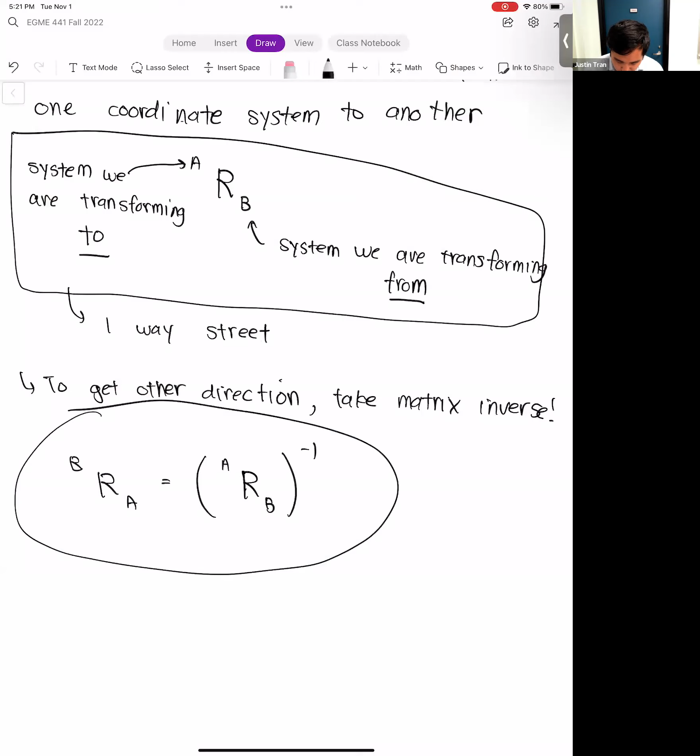Hey Charles, how's it going? Tired, yeah, it's that time of the semester. I feel like it's that time of the semester all semester. It's always a grind.

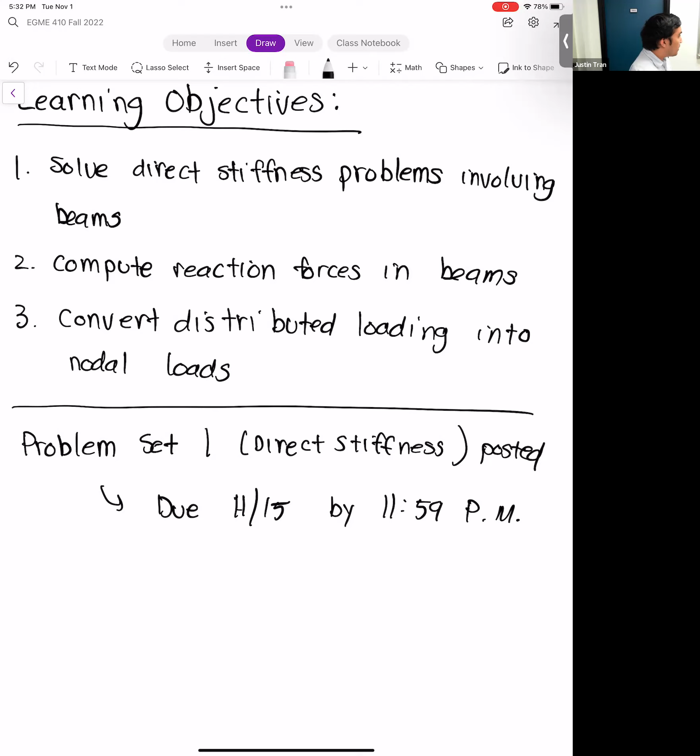After that, the next big thing in this class, now that the midterm project is done, is the midterm exam. So we do have one exam in this class, and the content for the exam is going to be purely based on the direct stiffness stuff.

The plan is to have the exam in class on the last day before Thanksgiving break. So this is going to be on Thursday, November 17th, in class.

These two things are very closely related. What you can expect on the exam are problems that look pretty much the same as on the homework, except probably a little bit easier because you don't have that much time on the exam.

I always try to make the problems pretty consistent with what I have on the homework. So if you can do the homeworks, then I'd say you're in great shape for the exam. Start working on the homework, and if you have questions, definitely let me know. I'm more than happy to answer.

It's not open notes, but you will be allowed a cheat sheet. What I always allow in my exams is a single 8.5 by 11 sheet of notes. You can write on both sides, whatever you want on it. The only thing I ask is that the cheat sheet be readable.

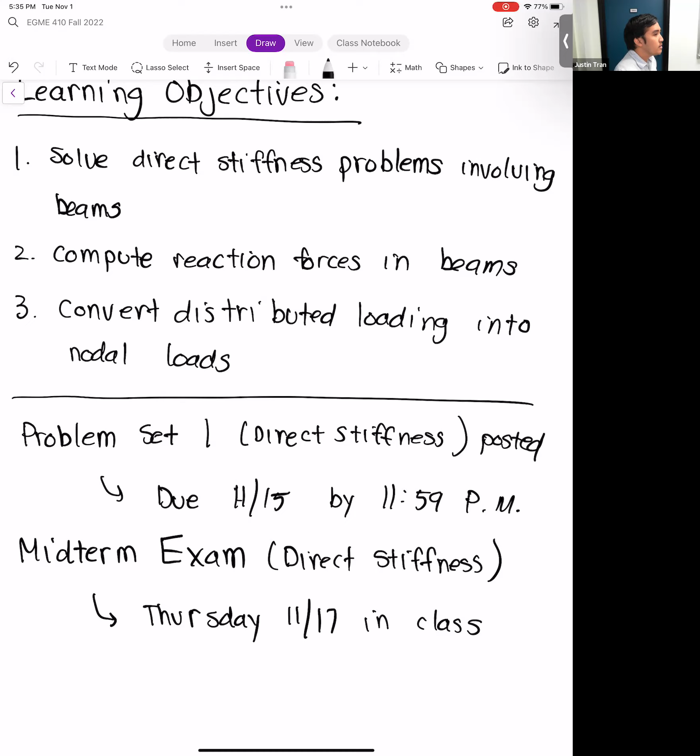We're going to pick up where we left off last Thursday, on beam equations. Question: will we go over how exactly to bring personal SolidWorks into ANSYS? Yes, we'll be reviewing that once we start talking more about the final project.

Question: do I suggest having a model the size of a toy? I think it helps just because it's easier to visualize that way, but you can also do bigger stuff. There's really no limitation, the only requirement is that you have a CAD model for it, and you can get one from somewhere online too, it's not something you have to make yourself.

Also, I know licensing is an issue, but even for big objects, sometimes you don't need as fine a mesh, if the deformations and stresses don't vary all that much. We can talk more about the final project probably on Tuesday. I'll give you guys a break from ANSYS for a while.

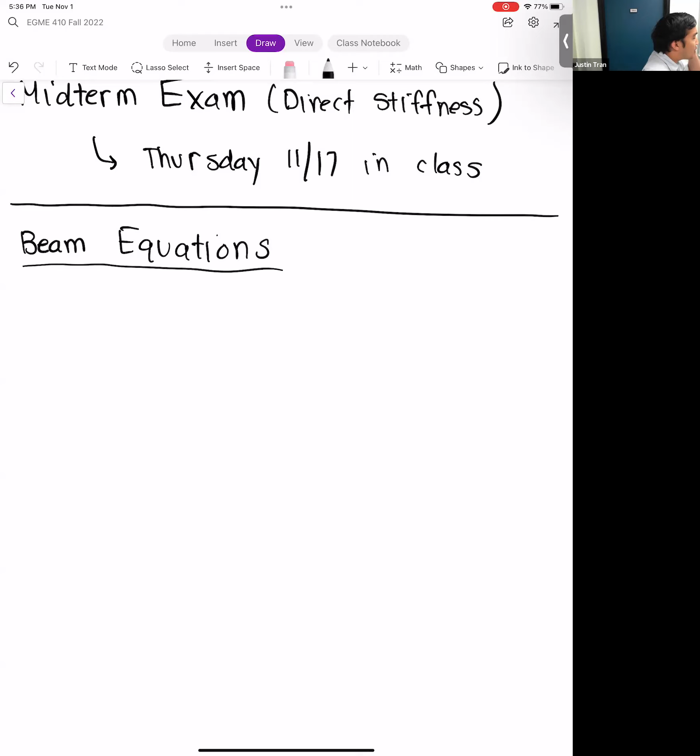Okay, beam equations. This is the last chapter in our direct stiffness unit, and it's all about how we can apply the direct stiffness method to solving for beam deformations.

Beams are quite different from the elements we've looked at before. We've looked at spring elements and truss elements, and even though springs and truss bars are quite different from each other, they deform in basically the same way, they can only be compressed or stretched. Beam elements, on the other hand, are different.

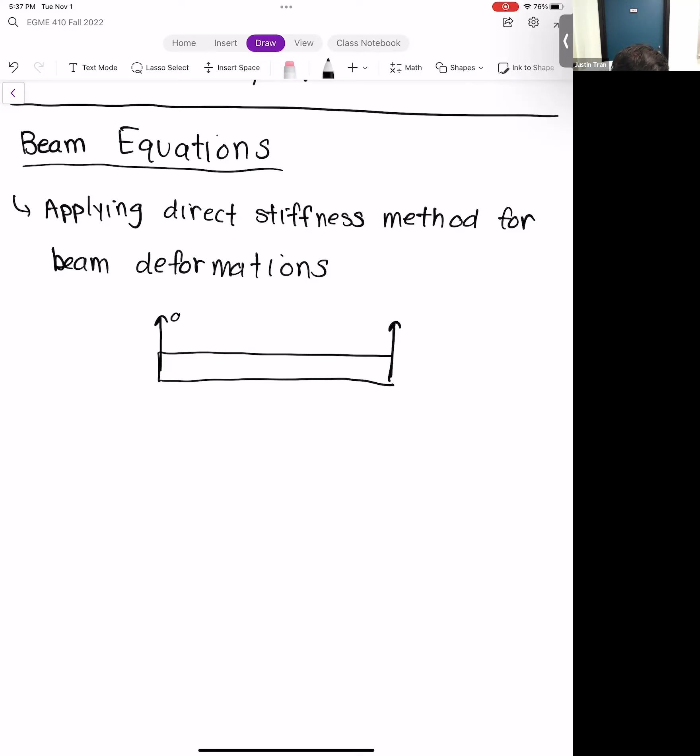Beam elements can deform perpendicular to its length. We call that deformation in the y direction, so that's d1y, d2y. They also consider rotations, so we have theta 1 and theta 2. What we covered last time was the element stiffness matrix for a beam.

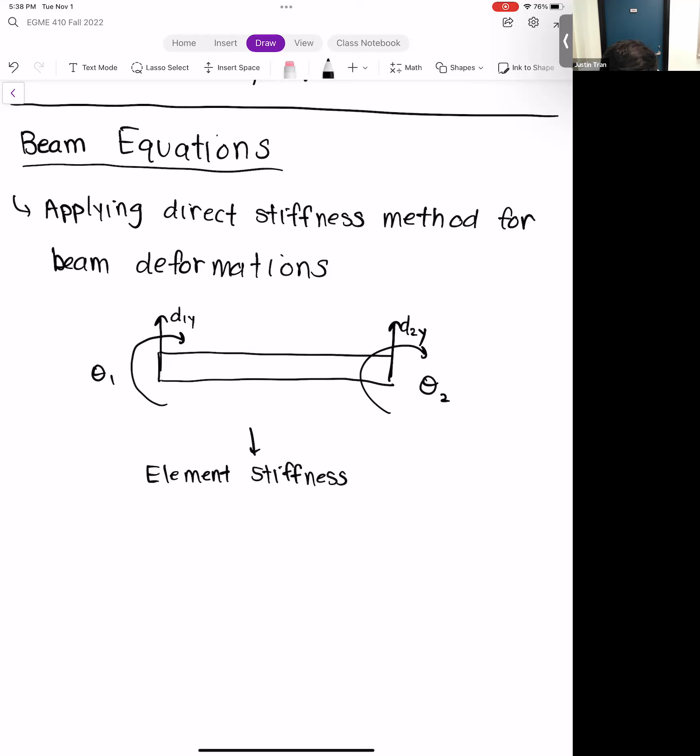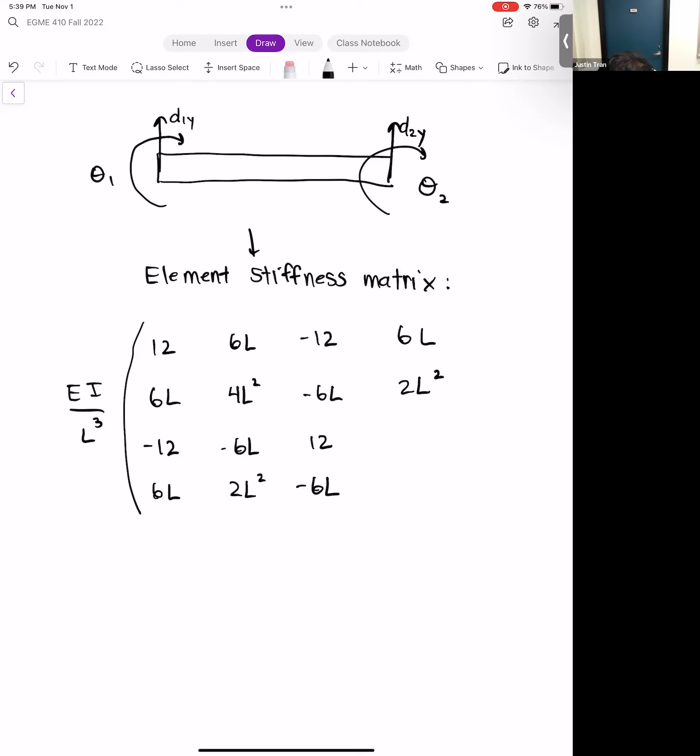If you have a beam, you can define its element stiffness matrix like this: E I over L cubed. Since our beam here has 4 degrees of freedom, we can solve for 4 things on a beam, so our element stiffness matrix also has to be 4 by 4. So our beam element stiffness matrix has entries 12, 6L, minus 12, 6L; 6L, 4L squared, minus 6L, 2L squared; minus 12... that's what our beam element stiffness matrix looks like.

Of course, if we relate this to the nodal degrees of freedom, we have d1y, theta 1, d2y, and theta 2. Based on this beam element stiffness matrix, we can then apply this to our direct stiffness method. But remember, the direct stiffness method itself is always exactly the same, the only thing that changes is what we apply for the element stiffness matrix.

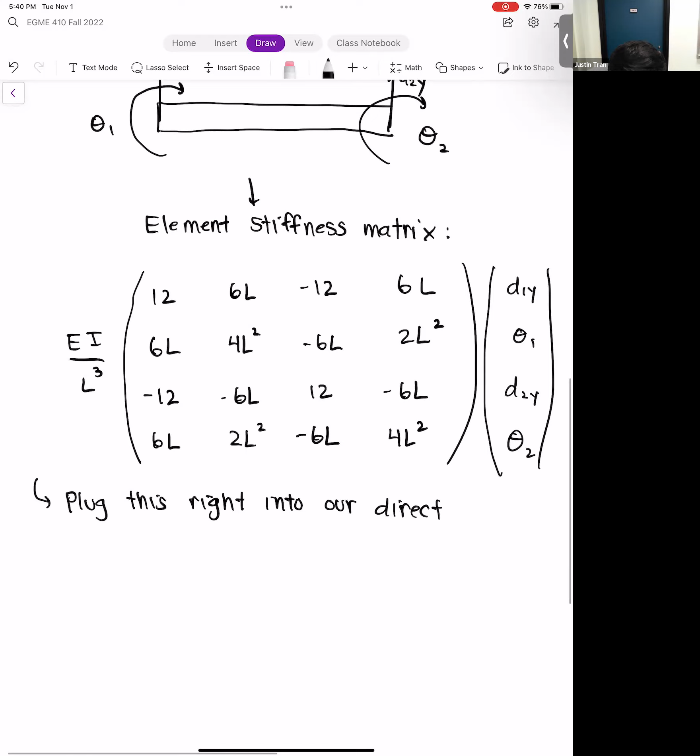So let me remind you of the steps that we take whenever we're solving a finite element problem by hand. Actually, ANSYS uses this process as well—it's just the way it accomplishes it is different.

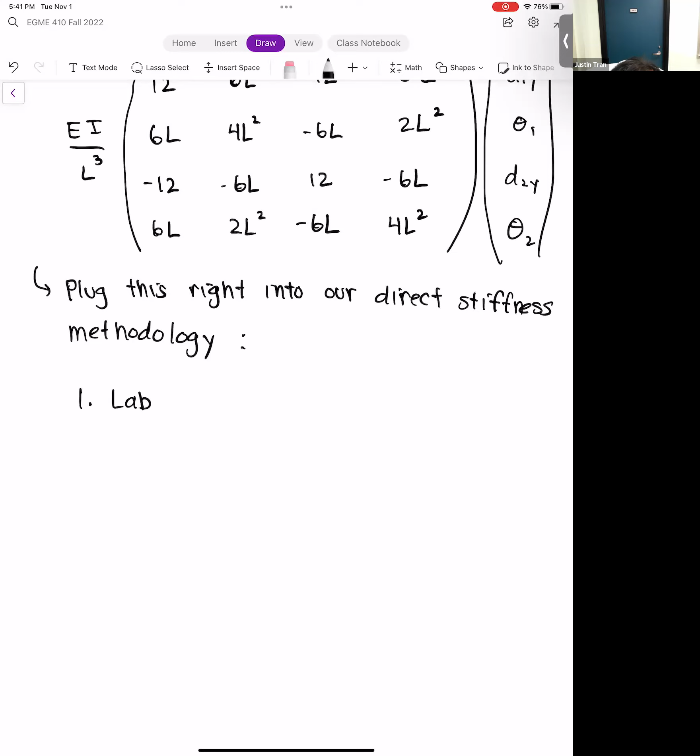Step 1 is to label the elements and nodes. That's most of the time done for you. Step 2 is to compute element stiffness matrices for each element—basically you're going to be computing the entries above there.

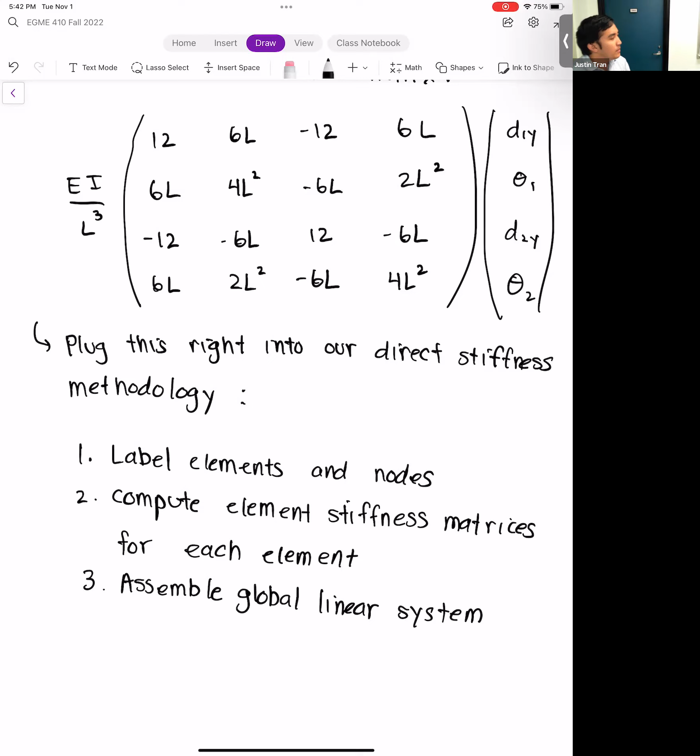Step 3 is to assemble the global linear system. Remember, we want to put all of the element stiffness matrices into a single framework so that we can actually solve it.

Step 4 is to apply boundary conditions, which are going to modify our global linear system. Step 5 is to solve it—or in other words, MATLAB's time to shine. Once you set up the system, that's about as far as you need to take it by hand calculations, and step 5 is we turn it over to MATLAB to solve it for us.

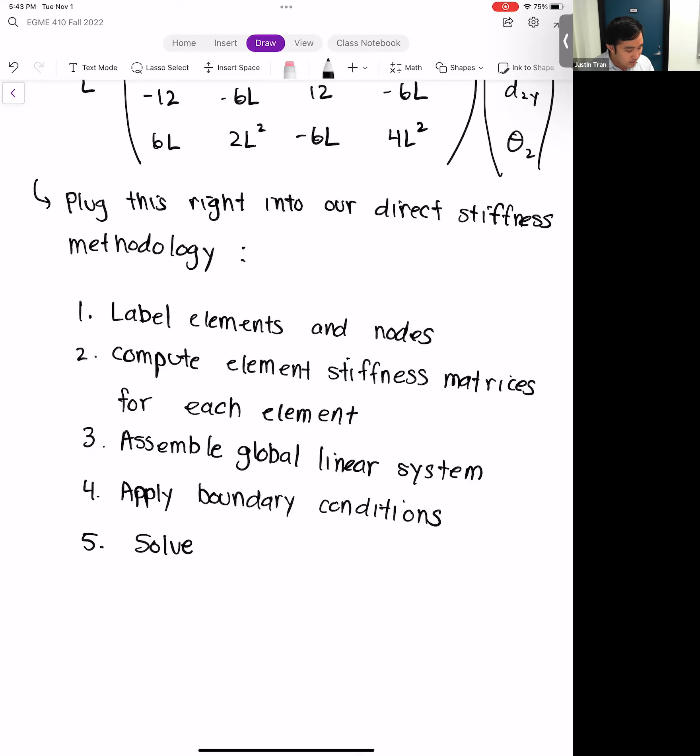All right, let's do an example, and this time we're going to put numbers in it so we can actually see it in action. We're going to go through this whole process. What's going to be interesting about this example is that we're going to combine beams and springs.

So let's consider the following beam.

Question: for the midterm, are we going to be able to use MATLAB as well, or just go up to step 4? For the midterm there's going to be no computers, so you're just going to have to take it up to step 4. What I'm going to check is if you set up the global linear system correctly.

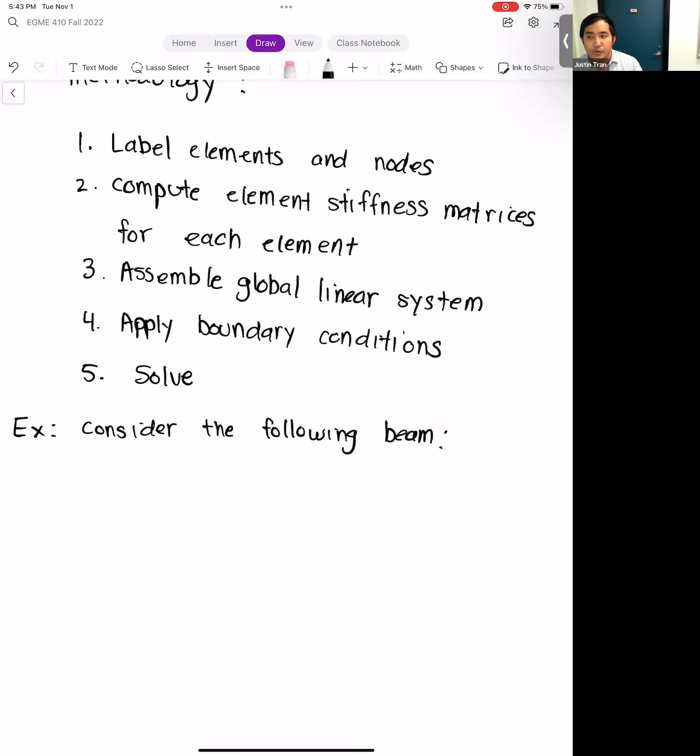All right, so let's say that we have a long beam like this, and I'm going to split it into 2 elements. We're going to have element A on the left and element B on the right. We'll say each of these beams have equal length, and the length is going to be 3 meters.

Let me go ahead and start labeling the nodes. We'll call node 1 attached to the wall. Node 2 is going to be right in between elements A and B. And node 3 is going to be at the very end of the beam.

At the end of the beam here, we're going to say that this is also being supported by a spring—so it's a beam that's supported by a spring at the very end. We'll call this spring element C, and the point at which the spring is attached to the ground we'll call node 4.

All right, so let me define the parameters for the elements. We'll say that elements A and B are identical, so the Young's modulus is going to be the same for both: 210 gigapascals.

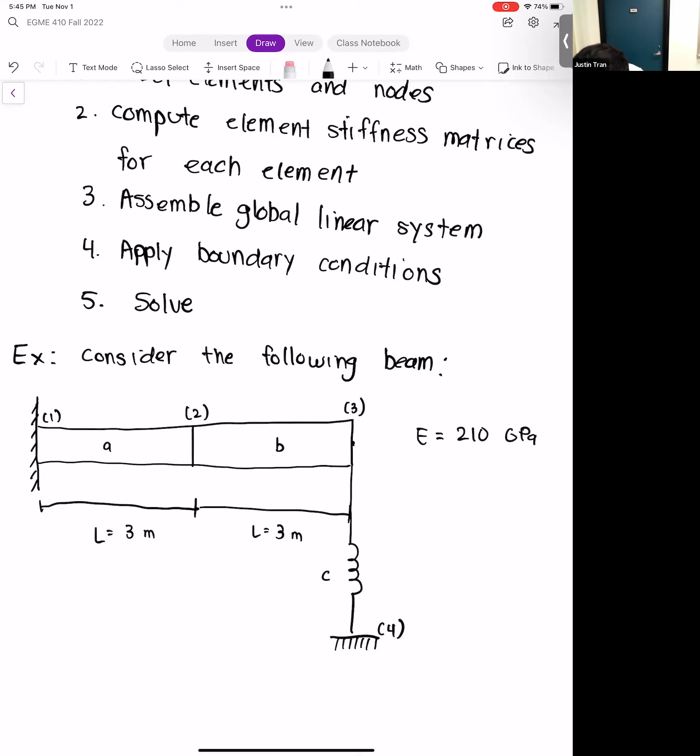The moment of inertia for the beam is going to be 2 times 10 to the minus 4 meters to the 4th. And for the spring constant for element C, we'll say that this is equal to 200 kilonewtons per meter.

So that's the configuration for the problem, but we also need a load. Let's say we have a load being applied directly on node 3—we'll call that load P, with a magnitude of 50 kilonewtons.

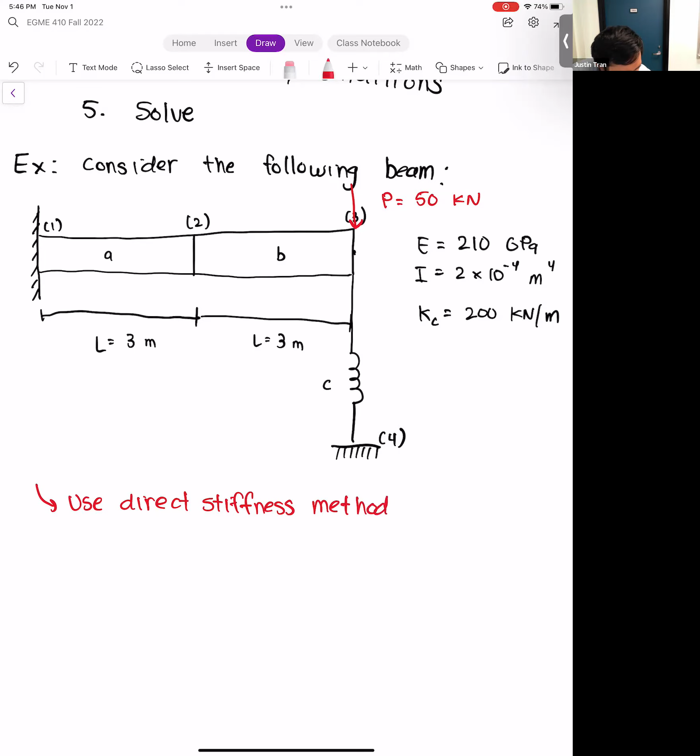All right, so based on the information given in this problem, let's use the direct stiffness method to compute the nodal displacements, or nodal deformations, at each of the nodes.

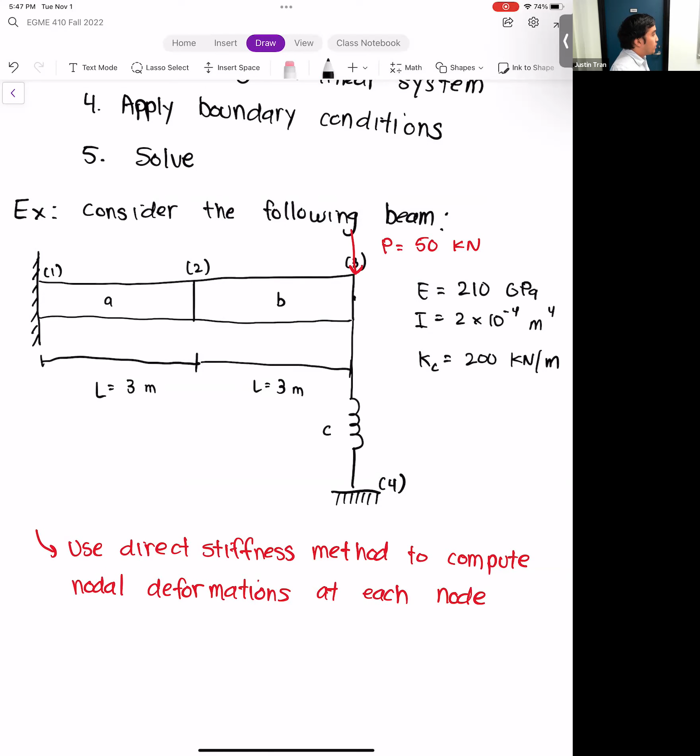All right, so we have a fairly standard problem here. We have three elements, 2 of them are beams, and we're going to go through that entire process. Any questions on the setup for the problem?

Question: how would the answer change if we did not use node 2? What Roman's asking is, we have a long beam here and we basically split it into 2 elements—so the question is, if we just consider that as one very long beam with a length of 6 meters, how would that change the solution? The biggest difference is that you're not going to be able to compute the deformation at node 2. Part of the reason why we split it up is so that we can compute the deformation in the middle of the beam.

If we make it all one beam, we only get the deformation on one end, but on one end it's a fixed support, so we know that's going to be 0 anyway. Then on the other end, by putting a node in the middle, we are able to compute the deformation midway through the beam.

But another benefit it gives us is the same logic we have in terms of meshing. You can see here that if we split this into 2 elements, that's almost like having a mesh with twice as many elements as opposed to 1. So it's actually going to make our result at the end of the beam a bit more accurate as well. And you can keep going with this.

You can keep splitting this up into more beams, split this up into 2, and so we have 4 elements there. That'll give you more and more accuracy. But it's a question of how much work are you willing to do versus how much accuracy you need. The more elements you have, the more data you'll get, and the more accurate your solution will be, at the cost of doing a lot more work than before.

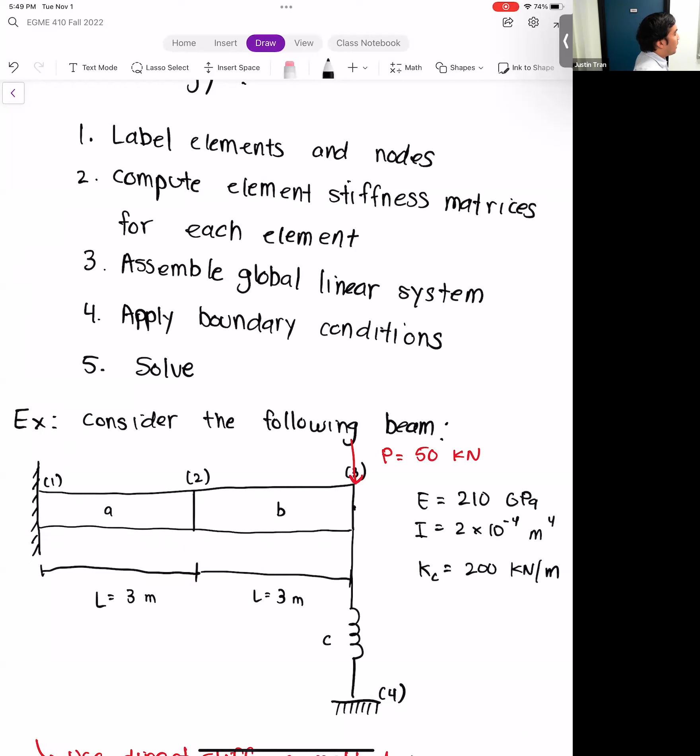All right, so let's go ahead and start applying the direct stiffness process. Step 1 is already done for us, we've already labeled all the elements and nodes. So let's start working on step 2.

Let's compute the element stiffness matrices for each element. Luckily for us, elements A and B have the exact same properties, so we only have to compute them once.

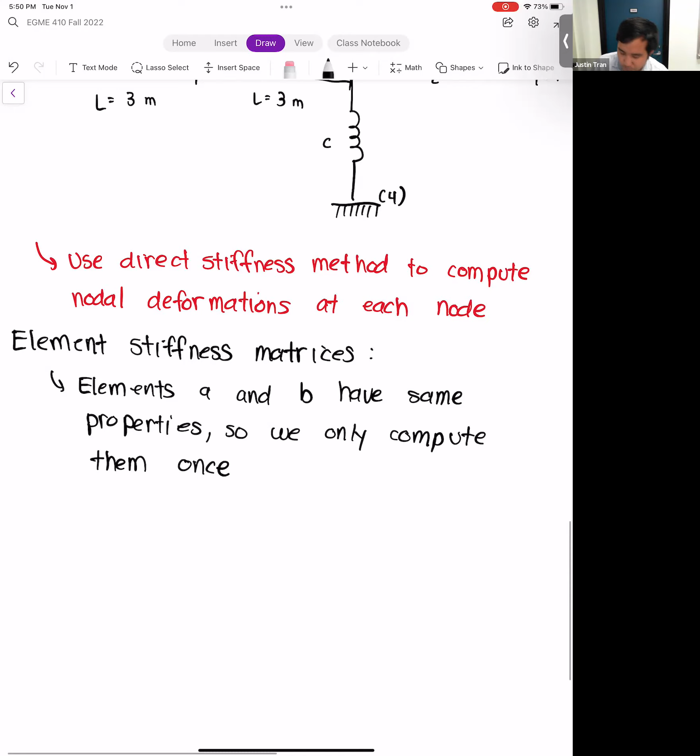Let's go ahead and compute those values. I'm not going to fully compute this just because the numbers are kind of nasty in this one. So just like I did in the last example on Thursday, I'm going to leave it in symbolic form and wait until the very end to plug in the numbers. But if you want, when doing these problems, you can plug in from the beginning, that's fine too, just be prepared to work with some pretty gnarly numbers. Because especially for this one, we have gigapascals, which is basically 210 times 10 to the 9th, pretty gnarly compared to some other stuff.

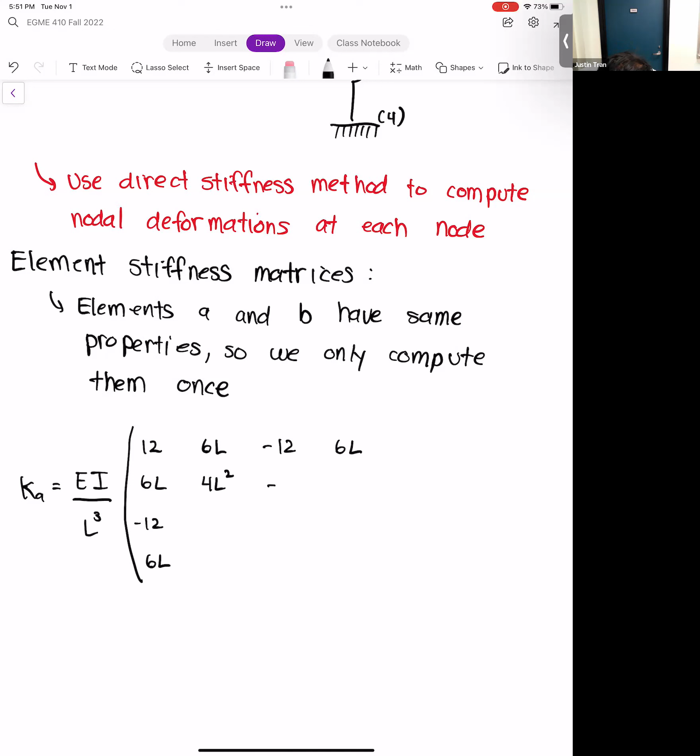All right, so we have Ka, for beam A, and we have EI over L cubed, multiplied by the 4x4 matrix: 12, 6L, minus 12, 6L. Element A is connected to nodes 1 and 2, so it's multiplied by D1Y theta 1, D2Y theta 2. We're going to have the same thing for KB.

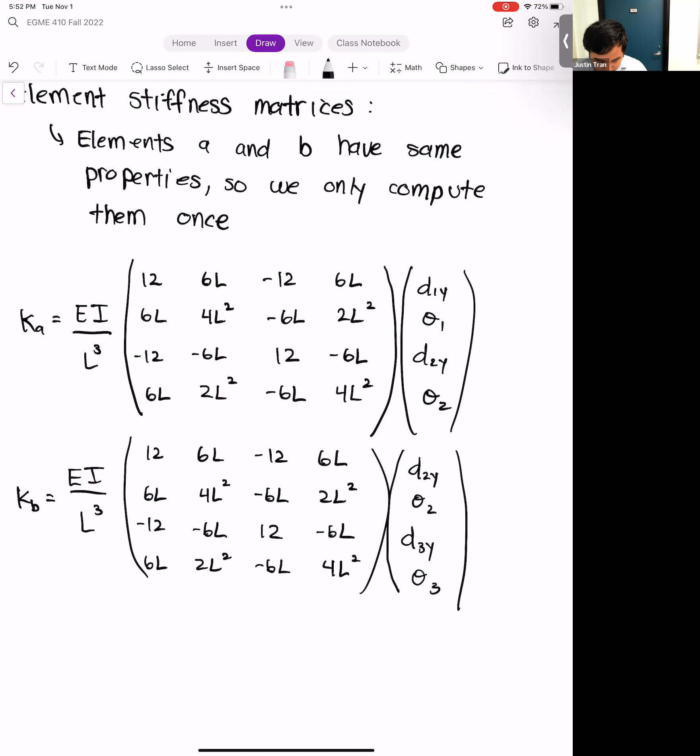KB numerically in the element stiffness matrix, they're all going to be exactly the same. Again, you can plug in the numbers if you want, but it's quite messy with this one, so it's a little cleaner to leave it as symbols. But remember, element B here is connected to nodes 2 and 3, so we need to reflect that in the solution vector. So those are the element stiffness matrices for A and B. I think what's probably more interesting is just the degrees of freedom that they're acting on.

Then we have the element stiffness matrix for element C. Element C is a spring. It's been a while since we've seen a spring, but remember, its element stiffness matrix is just a 2 by 2, which is a sight for sore eyes compared to all the 4 by 4 element stiffness matrices we've been working with. This is acting on nodes 3 and 4.

And remember, the spring, because it's kind of vertically upwards, it's only going to act in the y direction. So that's why we say the degrees of freedom for element C are d3y and d4y.

So those are our 3 element stiffness matrices. The next step is to assemble this into a global linear system. Any questions on this? All right, so let's go ahead and assemble now.

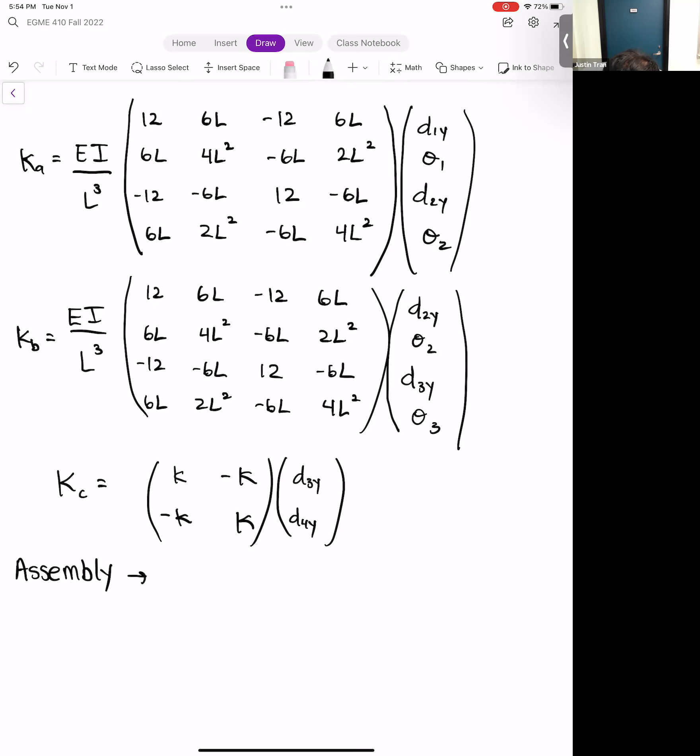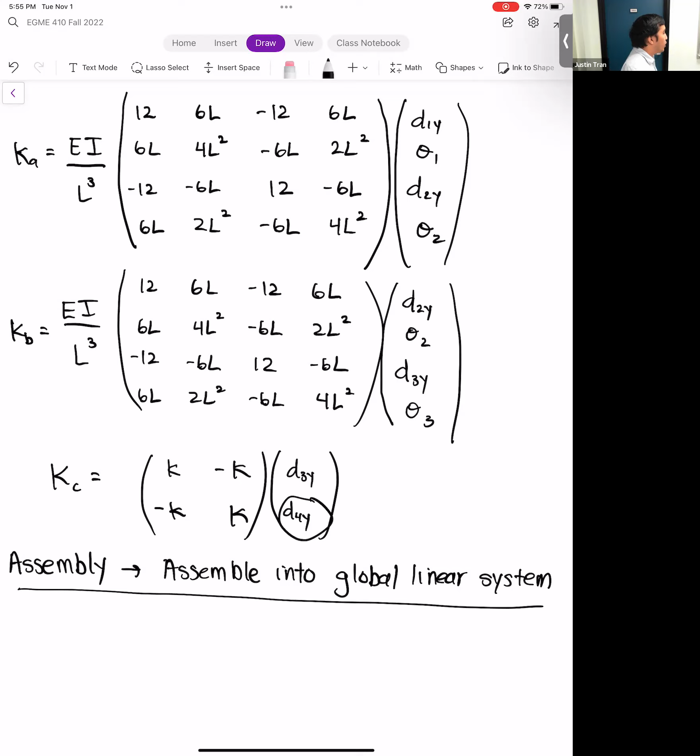Okay, so let's go ahead and pull the assembly together. This one's going to be a little bit different. Normally we have an even number of rows and columns. We're going to have 2 degrees of freedom for node 1, 2 degrees of freedom for node 2, 2 degrees of freedom for node 3. But node 4, you can see here that we only have 1 degree of freedom. We don't have a theta 4 for node 4 because node 4 is only connected to the spring.

It's also directly connected to the ground, so it's actually just going to be zeroed out anyway. But in case you're wondering why there's no theta 4 row, it's because there's no beam connected to node 4. It's only a spring.

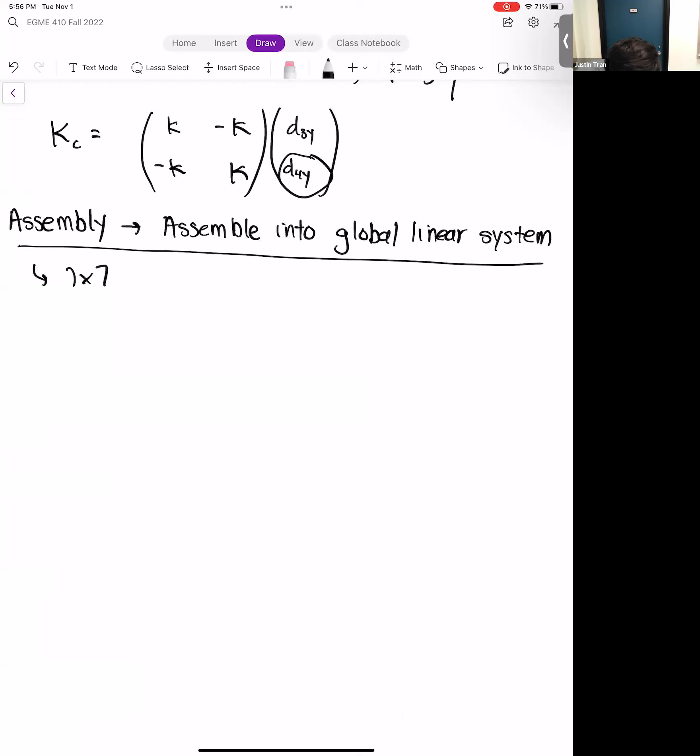All right, so let's see how this looks. Because of this, our global linear system here is going to be 7 by 7. Let me go ahead and draw that out. Let me start with the forcing vector. We have F1y, M1, F2y, M2, F3y, M3, and then F4y. And then we stop right there because we don't have any M4.

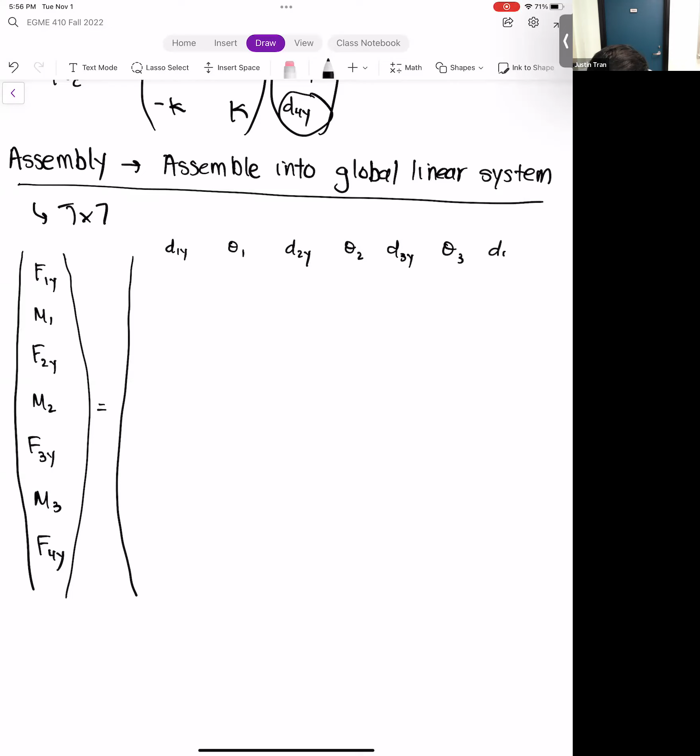Now in the columns here, let me write those out: D1y, theta 1, D2y, theta 2, D3y, theta 3, and D4y. There's no theta 4. All right, so there is our global linear system.

7 rows, 7 columns, and a lot for us to fill in.

All right, so first thing we're going to put in is element A. Element A is going to be nodes 1 and 2. Let me go ahead and box that off. So that's element A, and that's going to go into that box right there.

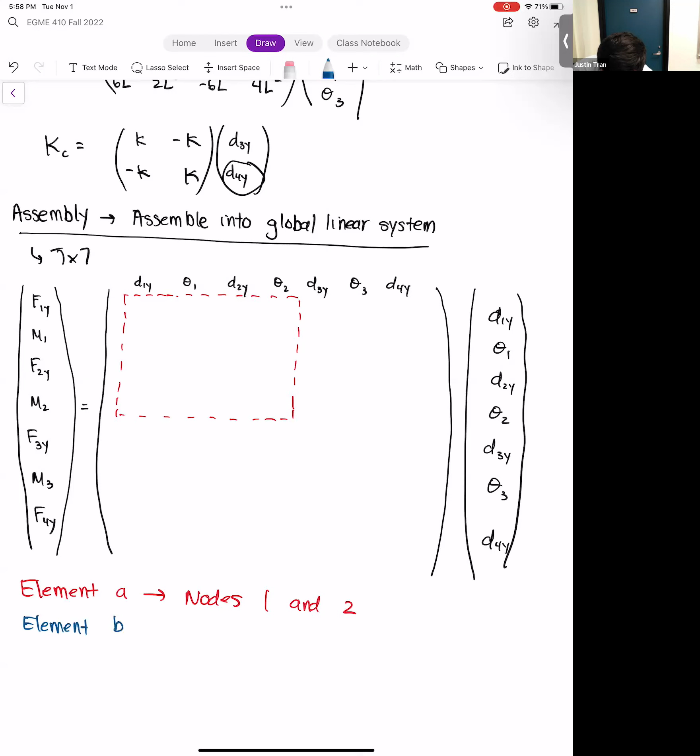Element B here is going to be nodes 2 and 3, and so we're going to go ahead and box those rows and columns off. Let me go a little bit higher on this one - it's tough to squeeze all that in there.

And then finally we have element C. Element C is nodes - well, it's not exactly nodes 3 and 4 because the spring is not going to contribute to theta 3, right? The spring only contributes to D3y and D4y. Because remember, the spring element stiffness matrix is only 2 by 2, so there should only be 4 entries in this global stiffness system that go along with that.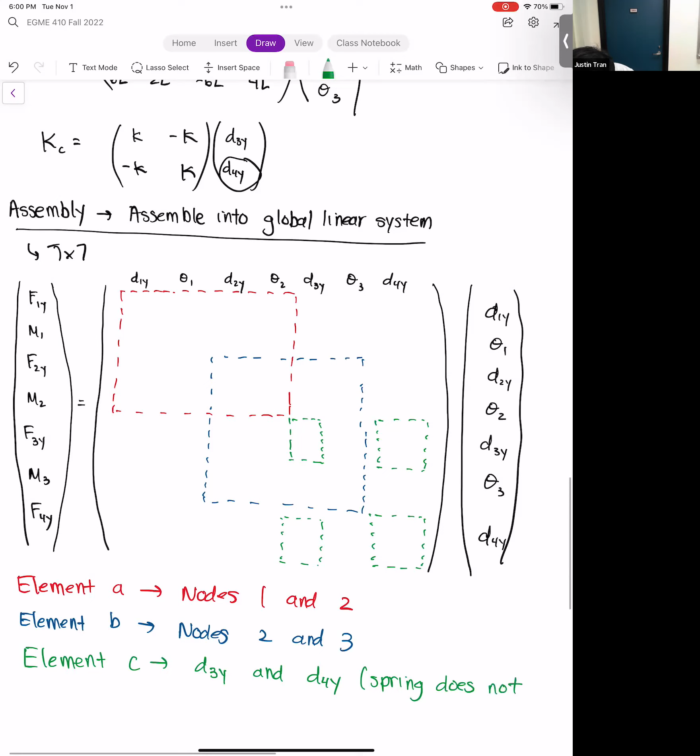So we're going to have it in the location of D3y, D3y - this slot right here. And then D3y, D4y, which is right here. Same for the one down here: D3y, D4y, and then finally D4y. Because the spring does not contribute to theta 3. All right, so all that is good.

So let's go ahead and start filling in. First thing I'm going to do, just to make it easier, I'm going to put the beam constant out in front, so that can be EI over L cubed. And so we start filling in: get 12, 6L, minus 12, 6L, 4L squared, 6L, 2L squared.

In the intersection we're going to add together. So when we add together, we get 24, 0, 0, and 8L squared. Let me repeat that here.

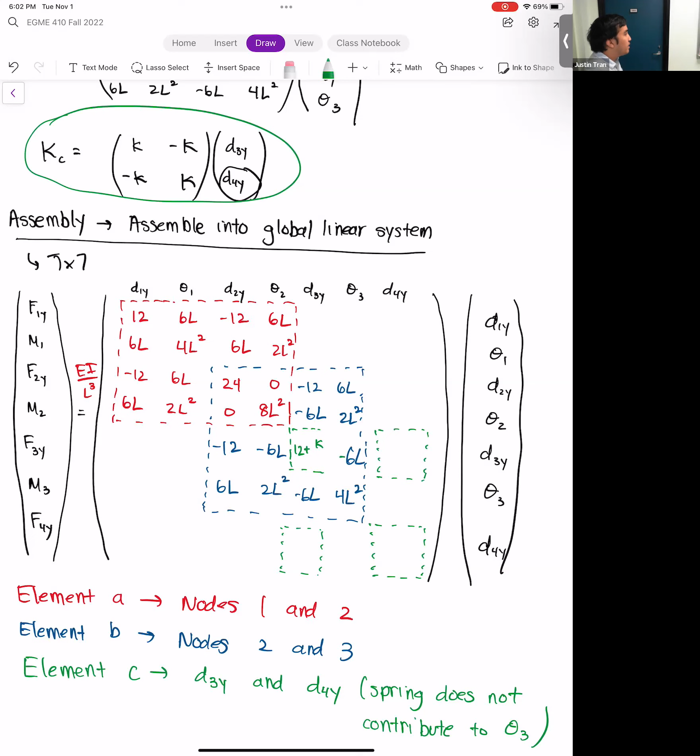So we have a 12 - that 12 is going to come straight from the beam element. And then we're going to add in the spring constant. You would think, looking at this equation up here for the element stiffness matrix for a spring, it would just be the spring constant K. But remember that we're multiplying EI over L cubed out in front.

So we have to account for that when we plug in our spring constant here. It's not just going to be K, it's going to be K multiplied by the inverse of what's in front: K L cubed divided by E times I. And then we have minus K L cubed divided by E times I, minus K L cubed divided by E times I, and then K L cubed over E times I. And everything else is zeros.

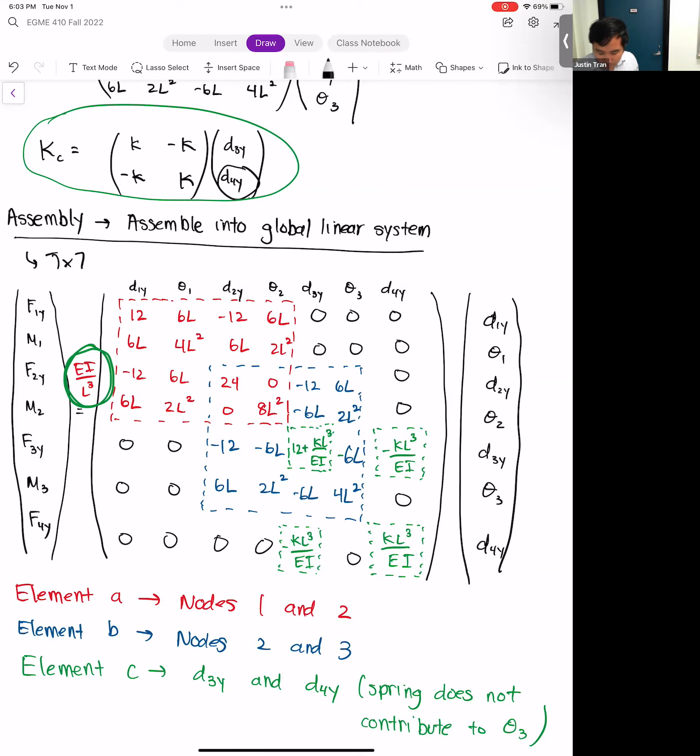I just zoomed in a little bit just so you can see it a bit better. All right, any questions on this? Does that make sense about why we multiplied K by L cubed over EI? Okay, all right, and so this is the assembly - this is everything that we need for that. And of course the next step is going to be the boundary conditions.

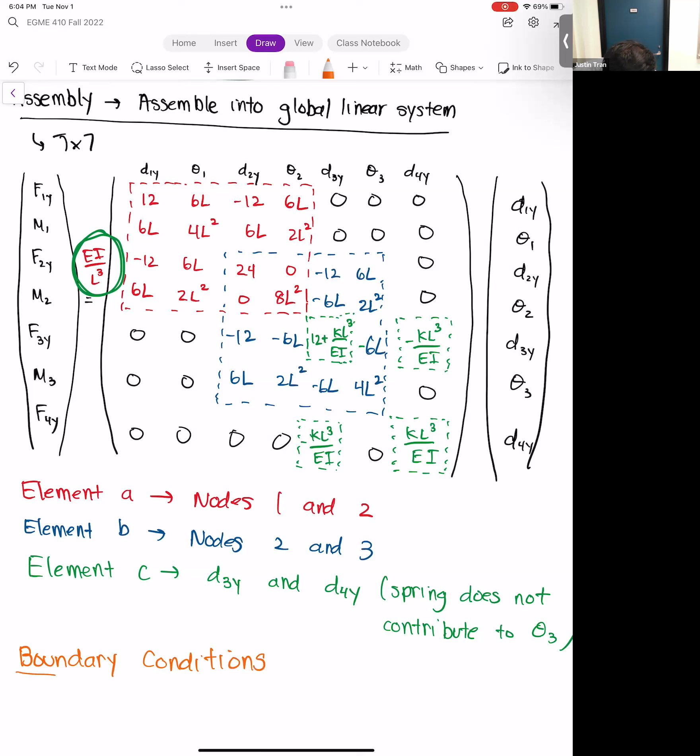So let's go back up to the figure here to define our boundary conditions. We have two constraints here: a fixed constraint on node 1, a fixed constraint on node 4, and we have a single load on node 3.

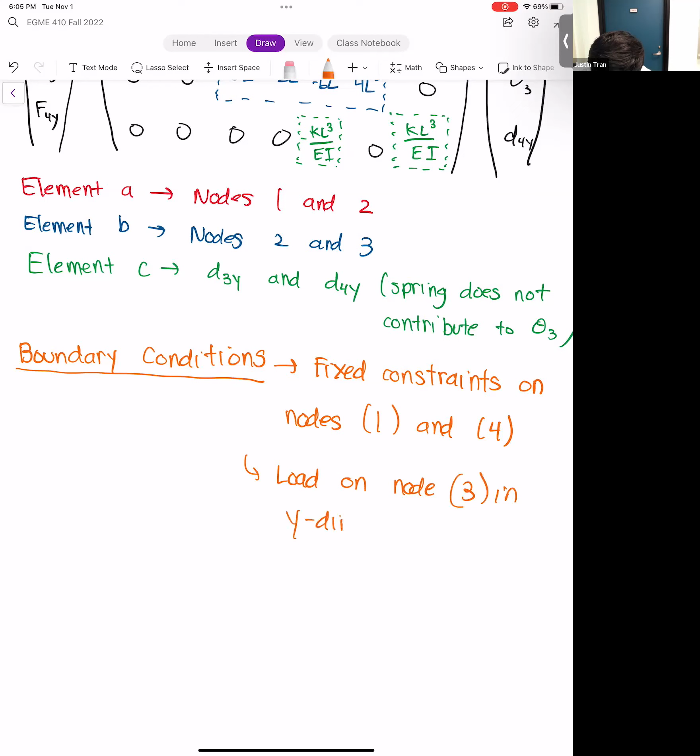Okay, so let's go ahead and apply these boundary conditions to our system. Let's go with the constraints first. Remember, with the constraints, we're going to eliminate the entire row that's associated with the constraint.

So for node 1, we're going to eliminate this entire row up here, and this row right here. We're also going to do the same for the last row because node 4 is also fixed. So let's go ahead and do that, and I'm going to go ahead and eliminate it.

Remember, the way that we do this is we replace the entire row with zeros, except for the diagonal. For the diagonal, we're going to put a 1 there. And then on the forcing vector, we're going to put zeros. Let me go ahead and do the same thing for the last row.

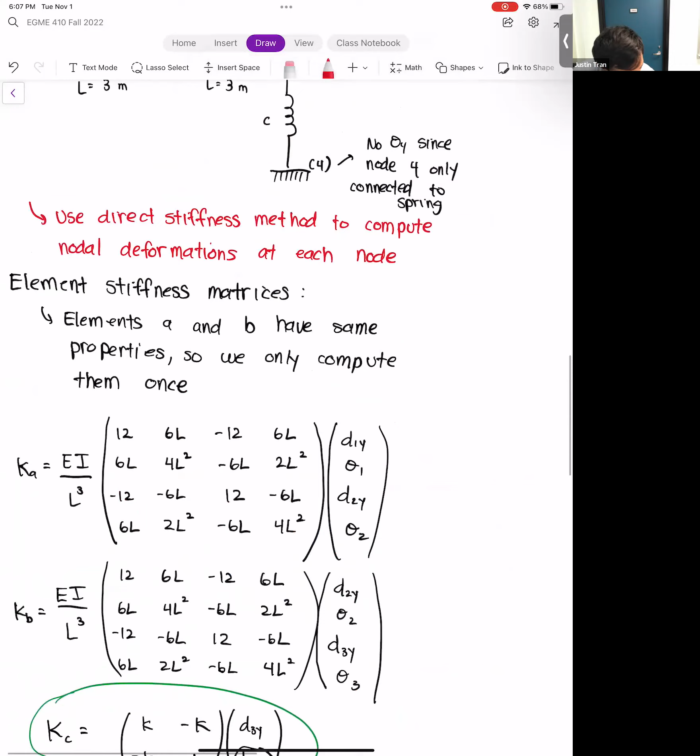The only load that we have is on node 3. So node 3 has a load of 50,000 newtons, or 50 kilonewtons, so we're going to have minus 50,000. And then for all the other nodal degrees of freedom, F2y, M2, and M3, we're going to plug in all zeros there because they don't have any loads being applied on those nodes.

So the next step for this problem is just to plug in all the numbers. Actually, I consider this to be the most annoying part of these problems, just plugging it into MATLAB. Maybe I'm weird, but I like the process of getting the element stiffness matrices, fitting them into the right slots, and then eliminating terms for the boundary conditions. All that is fun. What's not fun is plugging in a bajillion numbers into your calculator or into MATLAB. Even though MATLAB does do most of the computations for you, it's still kind of annoying to input all of this.

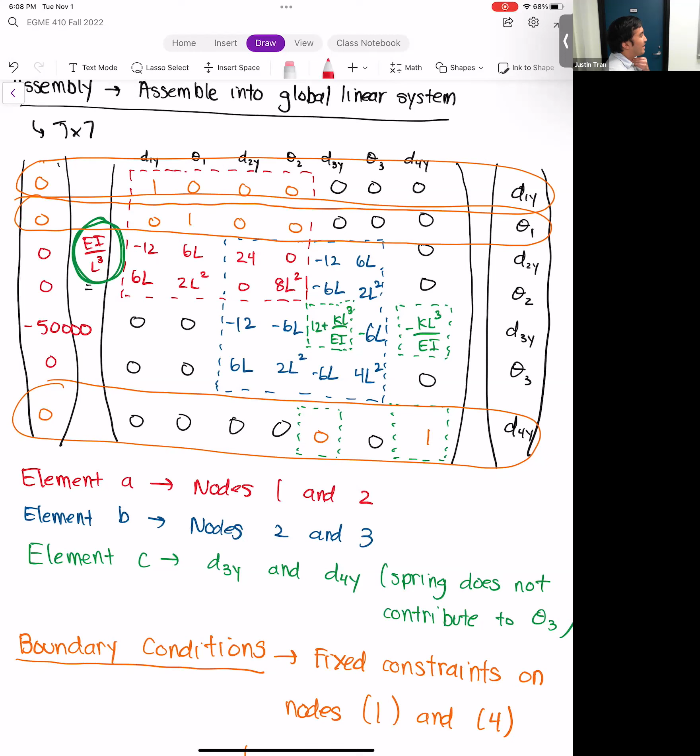And so after probably about 10 minutes of just inputting numbers, especially the Young's modulus here in gigapascals, then you can get the solution.

So if you solve this in MATLAB, we get the following results. We get d1y is equal to 0 meters, theta 1 is equal to 0 radians. Theta has no units. And that makes sense because node 1 was fixed, so we shouldn't get any deformation there.

d2y is minus 0.02 meters, and theta 2 here is minus 0.012 radians. Next we have d3y and theta 3. d3y is minus 0.0638 meters, and theta 3 is minus 0.016 radians. Finally, we have d4y, and d4y is 0 meters.

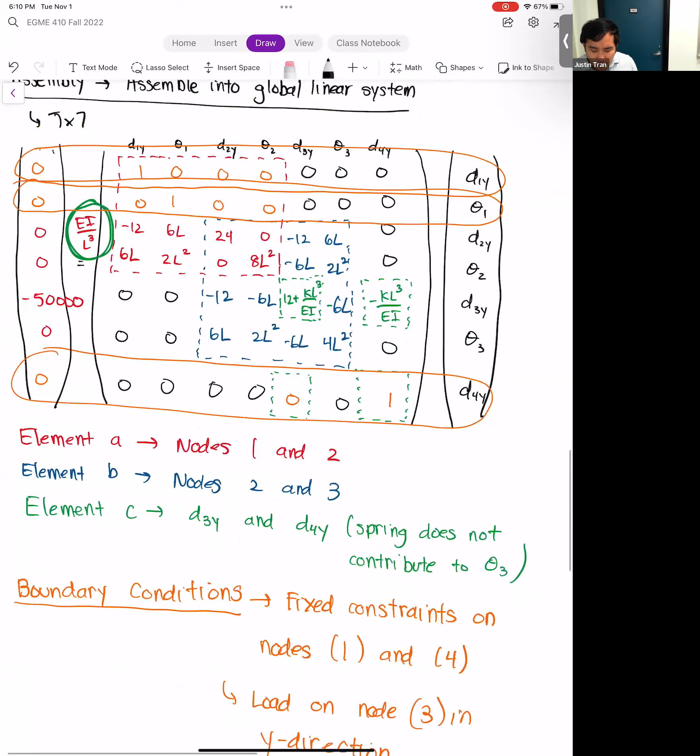What can happen here is that in addition to this y direction load, you can also have a moment. In addition to a load on node 3, you can actually apply a moment there as well. So let's say you have a torque, something you're twisting, and you're applying a torque there as well. Let's say that we have M3, this might be equal to 10 kilonewton meters. So in that situation, you have both a load and a moment applied on node 3.

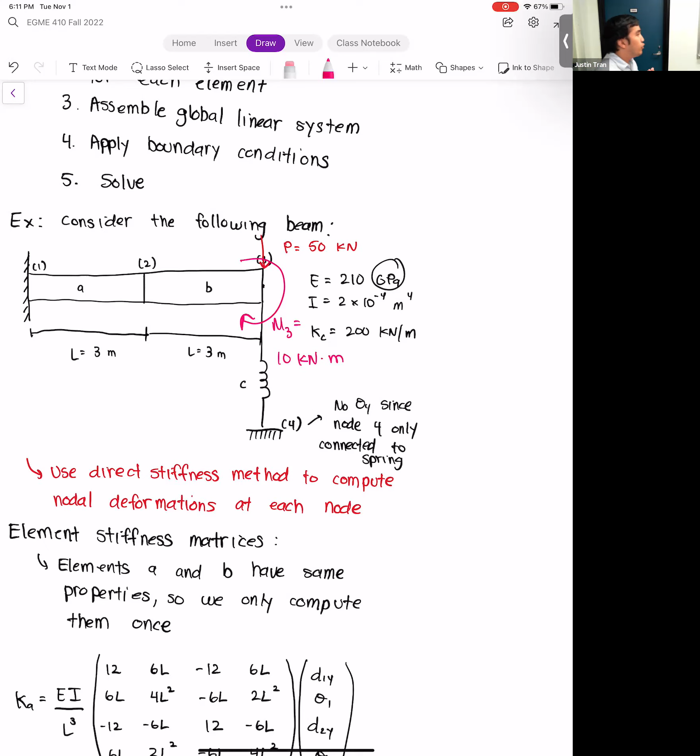To account for that in your system, you would just replace this entry right here, the M3 row, with that M3 value. So what did I say, 10 kilonewton meters? So this would be 10,000.

That's just... so absolutely, you can have multiple loads on one node. And then...

In the 2D truss problems too, where remember in 2D truss, we split it up into X and Y. You may have a load in the X direction, and you may have a load in the Y direction, and you can apply both of them on the system just like that. Yeah, it's the same for ANSYS as well.

And so I know some of you guys were doing that for your projects. I kind of scanned through that a little bit, for activity 3, right? And so we had the signpost project. You could apply multiple loads on the same location that represent different things. So you can have one load for the wind that's hitting the sign, but you can also have a load from, you know, maybe you're hanging a boulder for some weird reason from a freeway signpost, and that can be applied there as well.

Any other questions on this example here?

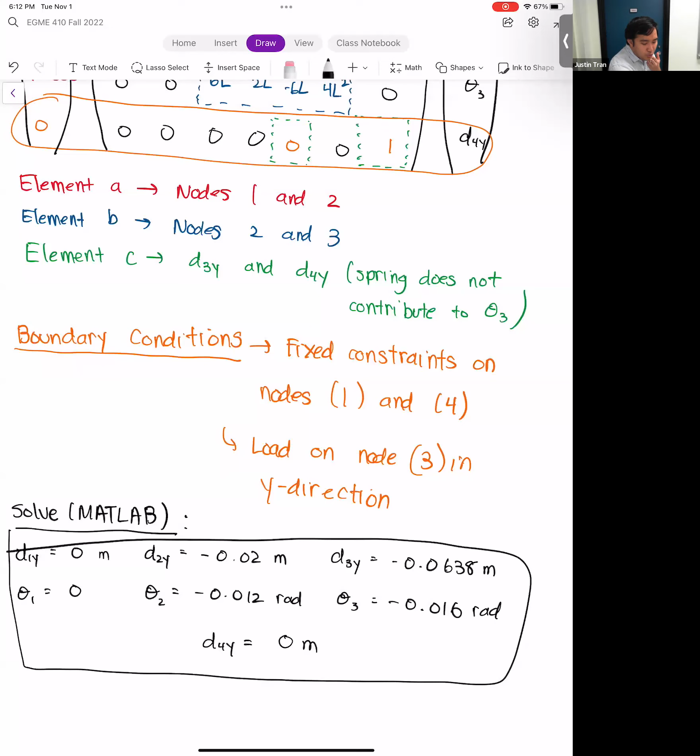So one more thing I want to do with this example before we move on is compute the reaction forces. If you remember, we did this with the truss problems. The idea with the reaction forces is that you want to compute what are the forces being applied at the locations of the constraints that are keeping the structure in static equilibrium.

Because all the cases that we're considering are static cases, so there's no movement, no acceleration or anything. By definition of a static system, the sum of all the forces that are being applied on the structure should equal 0. And now that we're considering beams too, that means the sum of all the moments on the system will also have to equal 0.

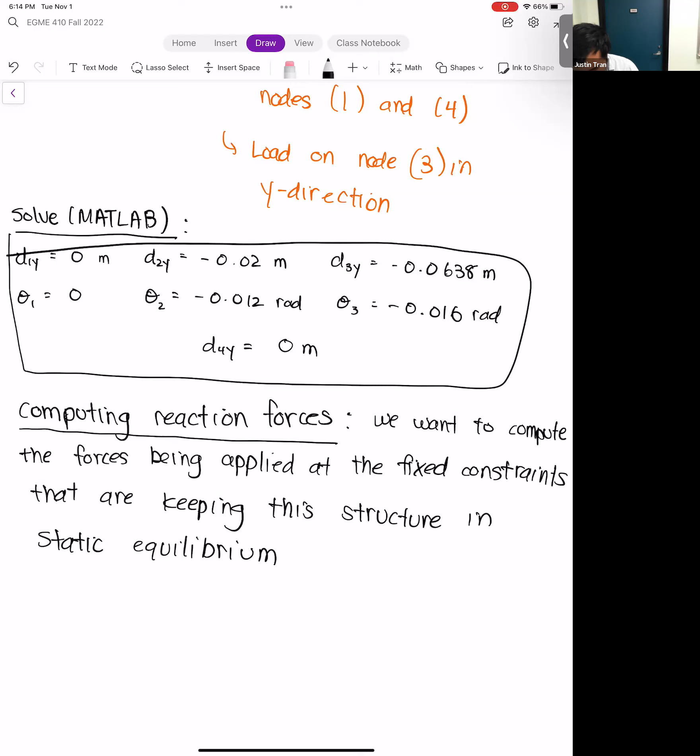And so if you recall, the way that we did this was that, after you solve for the deformation solution, after you solve for the nodal deformations, what you're going to do is you're going to multiply those nodal deformations by the global stiffness system before you apply the boundary condition. So basically in between steps 3 and 4 of the direct stiffness method.

So this is the step basically after assembly. After you assemble all of the element stiffness matrices into the global system, you take that big matrix, multiply it by the nodal displacements, and that's going to give you the reaction forces.

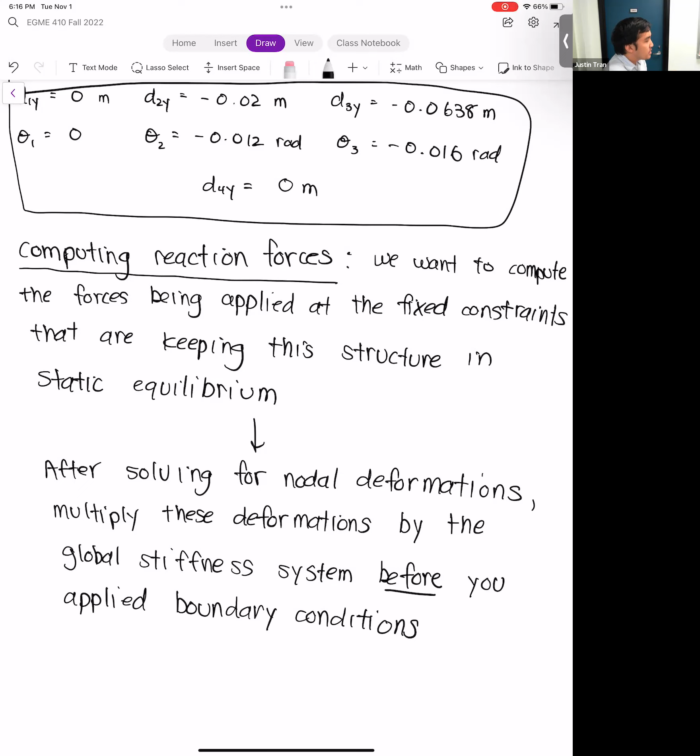Unfortunately, I don't have it for this one because I was lazy and I forgot this was part of the notes, so I already overwrote it. If you weren't lazy like me and you rewrote the system before the boundary conditions, this would make the step a lot easier. But because I was lazy, I had to pay the price now, and I have to write the whole thing over again.

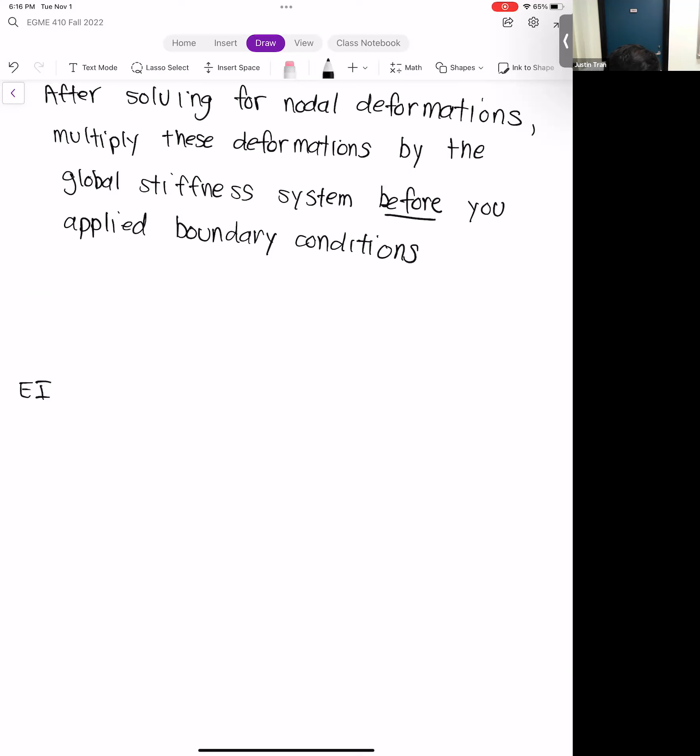So if you recall, or if you're watching this on YouTube, maybe you can rewind about 20 minutes, and you can see what it looks like.

And so we would have EI over L cubed, multiplied by a 7 by 7 system. My notes for this page are really faded, but we have 12, 6L, minus 12, 6L, 0, 0, 0.

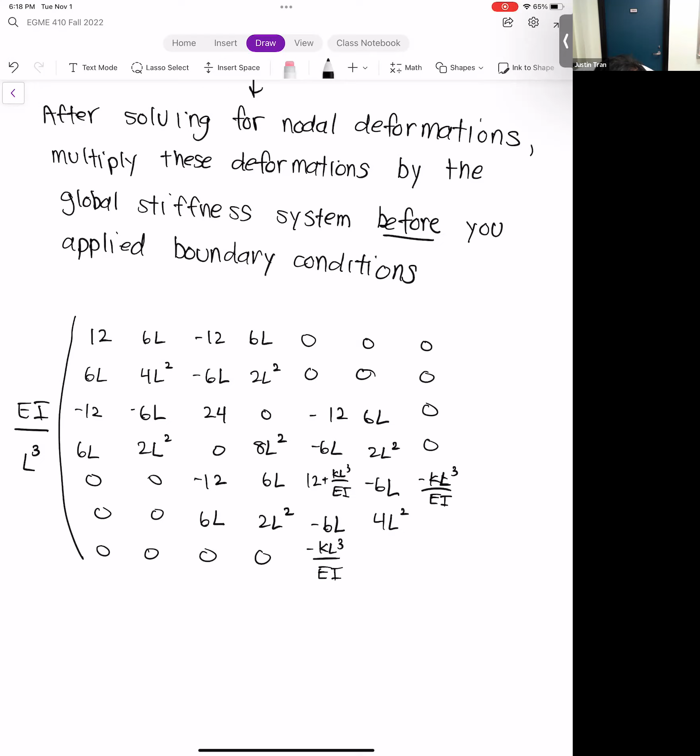And so that's what it would look like. So that was our global stiffness system before we applied the boundary conditions.

If you were not lazy like me and you kept this from earlier and didn't completely override it with the boundary conditions, you can just pull it down. Then you're going to multiply this by the nodal deformations.

And everything in this vector you just computed before. So all you would have to do is just multiply these two together, and of course you would probably do this within MATLAB.

If you save both matrices in MATLAB, before boundary conditions and after boundary conditions, you might save yourself some time here. You perform this matrix vector multiplication and you end up with the nodal reaction forces. It's always not a bad idea to check the nodal reaction forces.

It's a question of how much time you have, but if you're wondering whether your deformations don't look quite right, you can compute the reaction forces and do a sanity check. Because when you compute the nodal reaction forces, all the forces should add up to 0. The moments will add up to 0 too, but then you also need to account for the reaction forces. Usually just checking the reaction forces is enough.

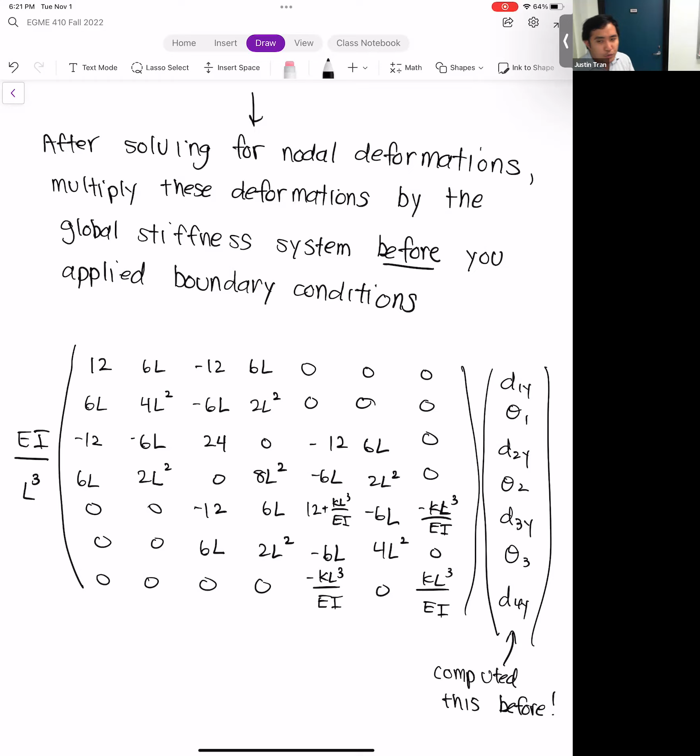Because what can happen a lot with these types of problems, where there's quite a significant computation part and a lot of writing too, is that you might miss a negative sign or mistype something. And so there's a lot of room in these types of problems for human error. It's always good to check your work to make sure it's good.

One example we can use for this problem is to look at the deformations. If we look back at our problem, we had basically two beams and an applied force on the end. Based on this geometry, we can expect that the deformation at the node where the load is being applied should be the highest, since it's also farthest away from the fixed support, which gives it a lot of stability. So we should see that the deformation is greater there than at node 2, where node 2 should have less deformation than node 3.

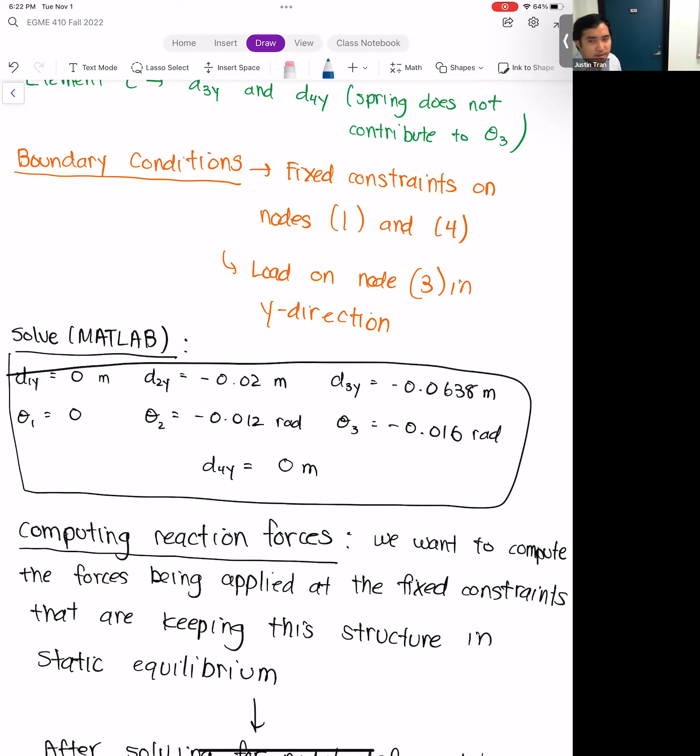If we look at our solution and look at D3y, we can see that D3y has a higher magnitude than D2y by about a factor of 3. So that matches up and is pretty consistent with what we expect. When you're doing these problems, I know they're time consuming and require a lot of writing and computations, but always be checking your work, because you'd be surprised to see that you just miss one negative somewhere, and that throws off your entire solution. These problems are actually quite sensitive to things like that.

Any questions on this?

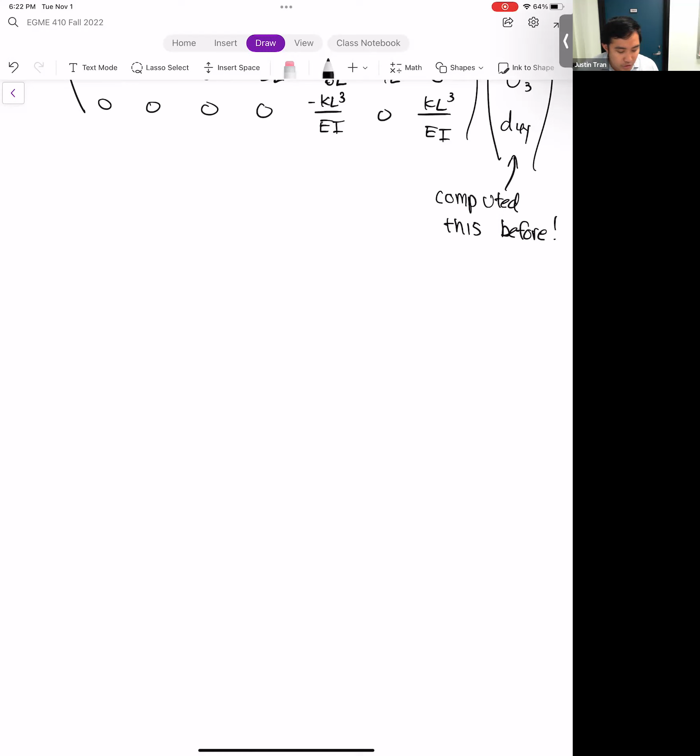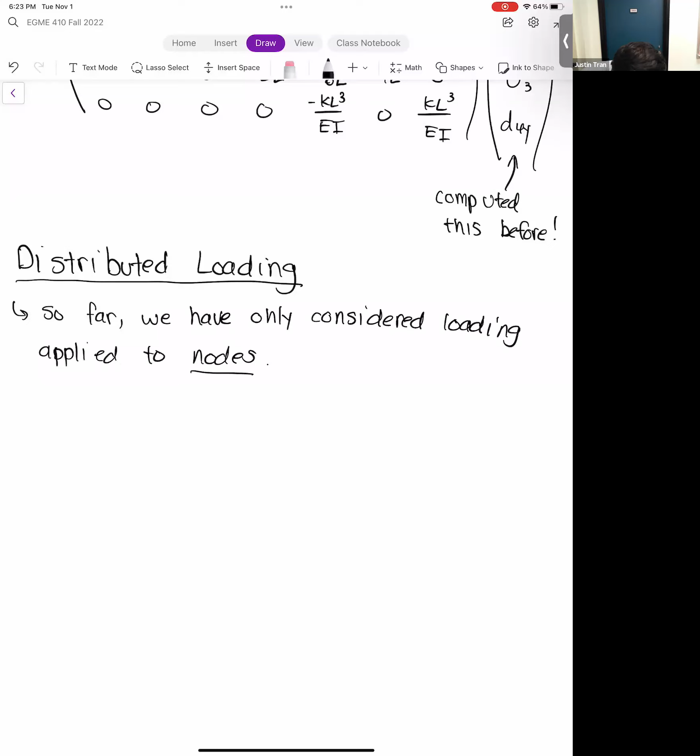The last major thing we'll talk about for beams is this idea of distributed loading. If you've noticed from all the direct stiffness problems we've been doing so far, all of the loads have only been applied on specific nodes. In other words, all the loads we've been considering have been concentrated on single points, and those points are at the nodes of our system.

This is a little bit different than how we do it in ANSYS. Remember in ANSYS, when we're applying our loads, forces, and pressures, we usually want to apply this on as wide a surface as possible. Ideally we apply it distributed on an entire surface, but if that's not possible, we apply it along an edge, and in the worst case we apply it at a point. So point loading or concentrated loading is usually the least desirable thing we want to apply in finite elements, but we've kind of been doing it in direct stiffness.

The reason we're doing it in direct stiffness is because it fits very cleanly into our global linear system. When we have a load that's being applied at a point, we just apply that load directly onto that point in the global linear system.

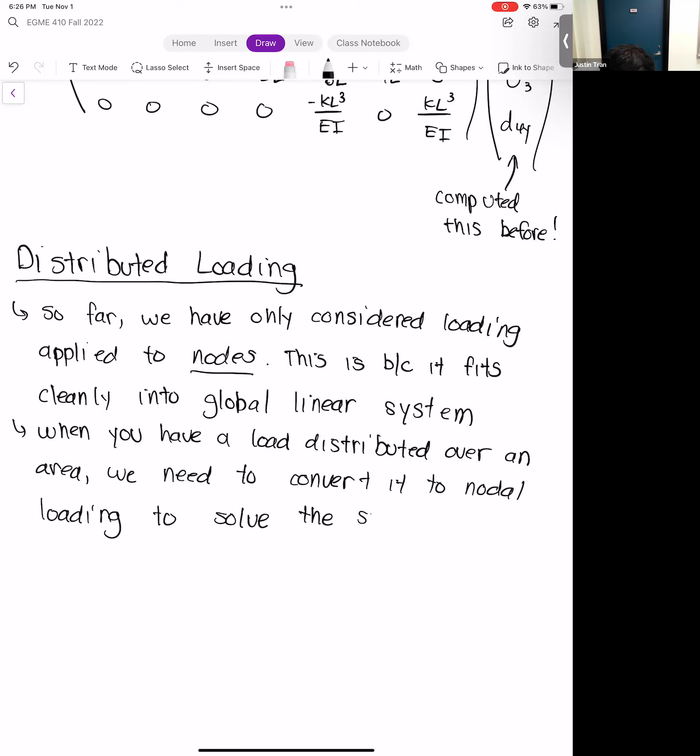Actually, that's not too different from how it's applied in practice. Even when you apply a distributed load, a load that's distributed along an entire surface, what ANSYS will do is convert that distributed loading into loads applied at certain points. That fact is true even within ANSYS.

So the question now is, how do we go from a distributed loading situation to nodal loads? Basically, what we want to do is let's say we have a beam like this - it's a simply supported beam where we have loads being applied on the entire surface, so it's distributed all throughout.

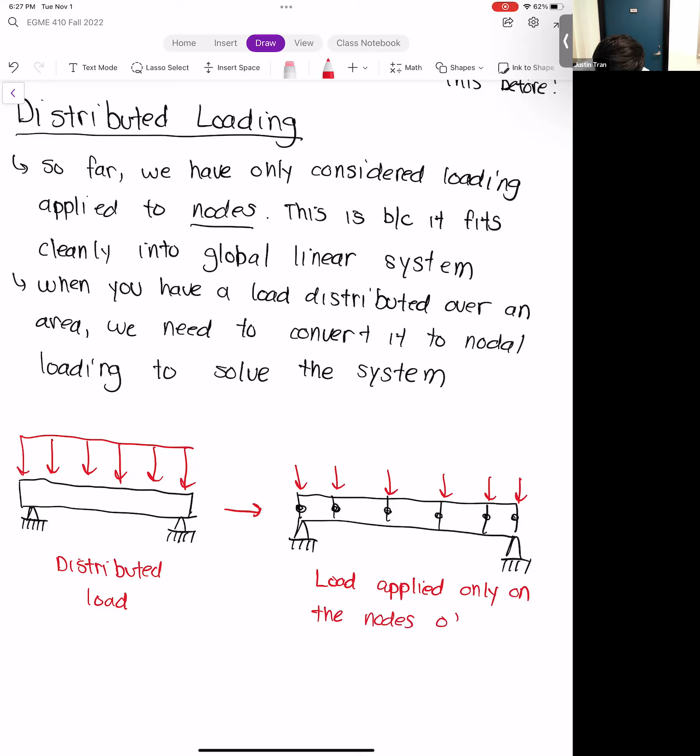So the question is, how are we going to go from this to a situation where we've taken the beam, discretized it, or meshed it into little beamlets, where each of these is a node? Instead of a load distributed evenly across the whole surface, we want to convert it into loads that are applied only on the nodes of our mesh. So the question is, how do we do this process?

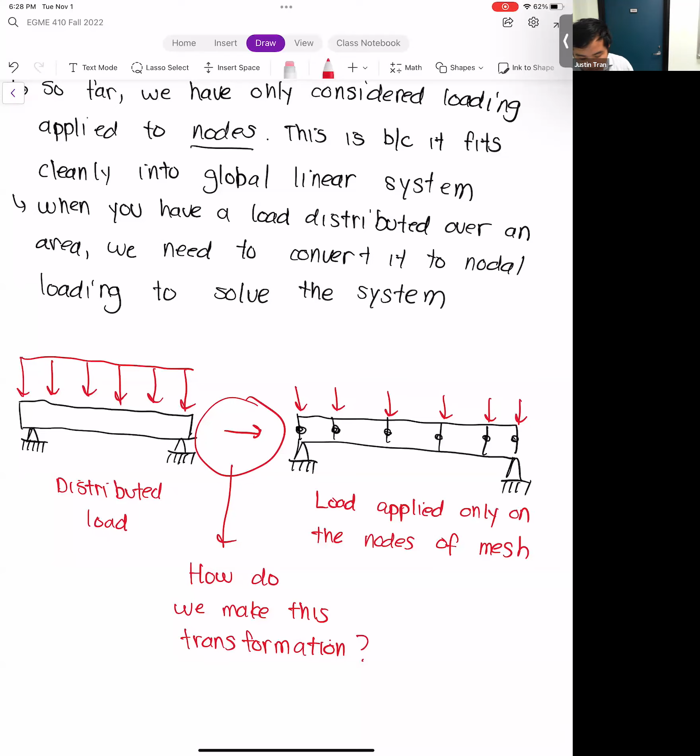So beams kind of provide the best setting for this, because we're considering deformations that are perpendicular to the beam, and so we can distribute load all across the beam. The key to this is this idea called work equivalence, which we're going to leverage here.

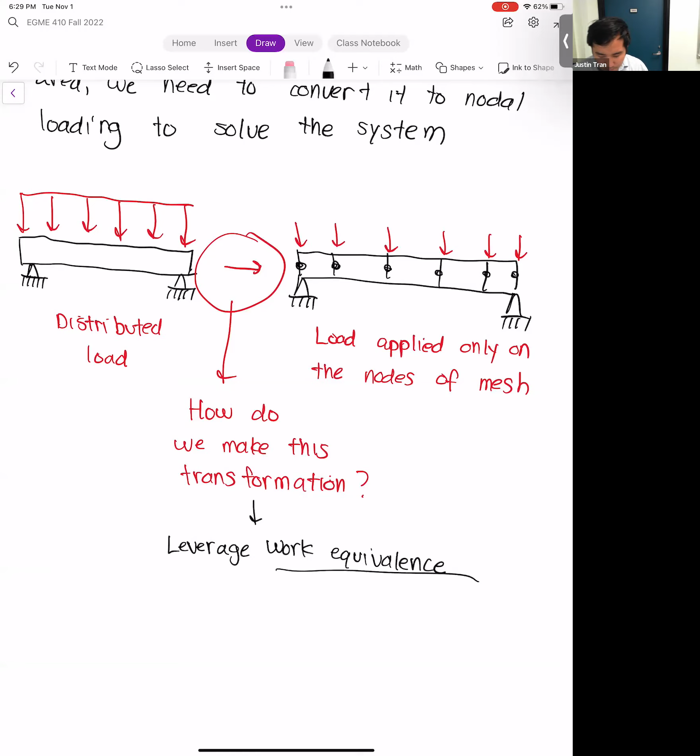That's basically the end goal. Whenever you have a distributed loading, you can't directly plug that into a global linear system. So you need to first convert it to nodal loads, just so you can process it mathematically. Any questions on this?

Okay, let's start. We have about 15 minutes left, so I think we'll introduce this idea, and then we'll hash it out on Thursday.

Right, so the idea behind work equivalence is that when you apply a load onto a system, that load is going to cause the system to deform, for an elastic structure.

That's kind of the basic tenet of almost everything we're doing in this class. So when you put it another way, you're basically saying that we have a force that's causing some kind of displacement in the system.

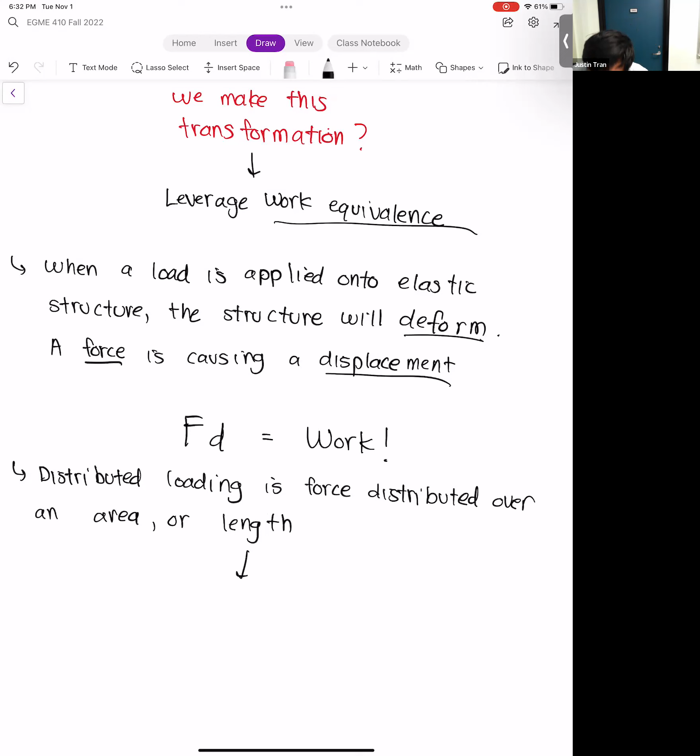If we think of like a pressure, a pressure is a force divided by an area. So the units for that would be, if we use SI units, newtons per meter square. Or if we're looking at a 1D case, and we have a force distributed over a length, the units are going to be newtons per meter.

So if we wanted to compute the amount of work that the distributed force is doing, we can't just multiply it by the deformation.

Because the units aren't going to match up. Remember, in order to get units of energy, you need basically Newton meters, which is the same thing as a joule, right? So if we just multiply the distributed loading by that, we're either going to get Newtons by itself or Newtons over meters, which is not the right units. So in order to get work from a distributed loading, we need to integrate the product of distributed loading and the deformation.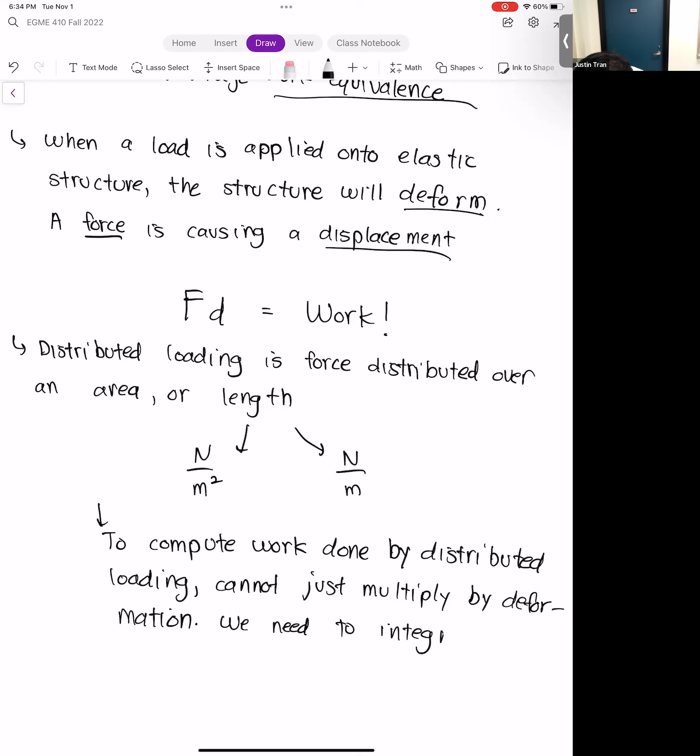So what we can say is that the work done by distributed load, we'll call that Work-distributed, is equal to - and I'm going to take the case of a force exerted over a length, assuming the distributed force has units of newtons per meter - this is going to be the integral from 0 to L of P of X, where P of X is the distributed load.

And distributed load has units of newtons per meter, multiplied by D of X, where D of X here, in this case we're looking at a beam, so this is the beam deformation, dx.

And so that integral, because of the dx at the end, adds another dimension of length to this. So we have newtons per meter multiplied by the deformation, which is another units of meters, multiplied by dx, which is just another units of meters. So we end up with the right units here.

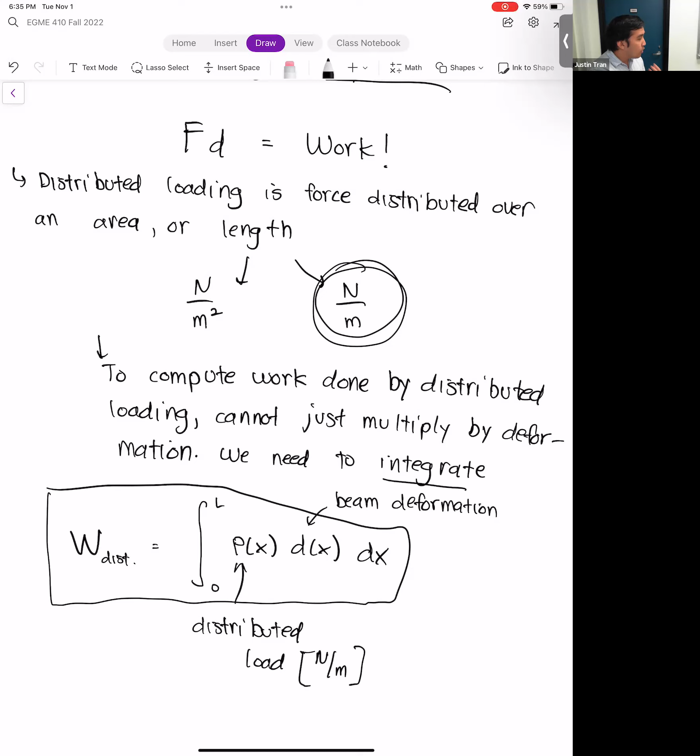We're not going to do any calculations on it, but if you wanted to find the work done by a distributed force, like a pressure, you would do a double integral: double integral of P of X, where this is maybe like a pressure, which is newtons per meter square, multiplied by D of X, dA.

And so if you wanted to do the same computation for a force distributed over an area, you would use the formula on the bottom. But we're not going to focus on that for this class, just because doing one integral, you'll see, is already enough. That's how you would do it in 2D.

So go there. Any questions on this?

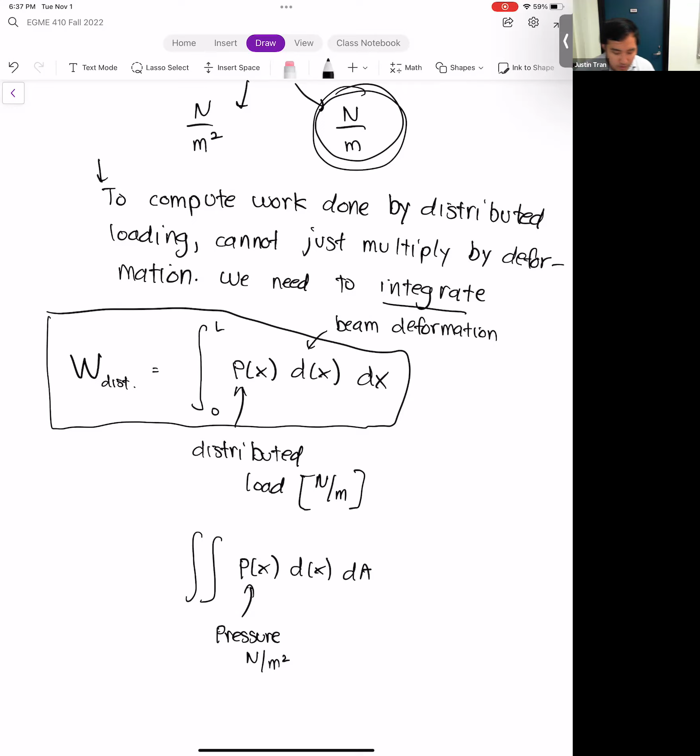Okay, so that's the work done by a distributed load. I'm going to leave that alone for a second, and then let's look at a nodal system. By nodal system, I basically mean a system where the loads and the deformations are being computed at the nodes.

Okay, and so for a nodal system, we have something that looks like this. So here's our beam. I'm going to isolate the beam for a second, so no constraints.

And so the deformations on this beam would be, let me use blue. So we have D1Y, D2Y. We have theta 1, theta 2.

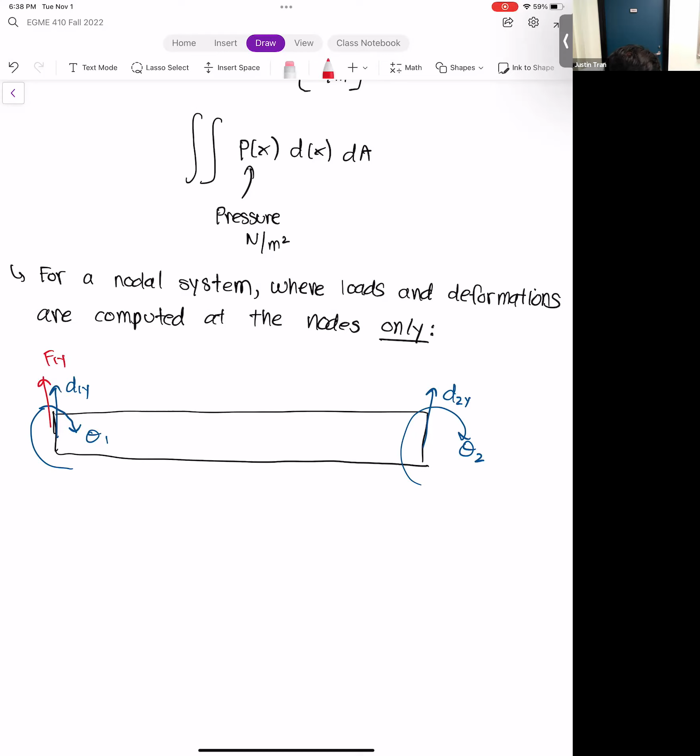So this would be like the solution to a direct stiffness problem with beams, and so we would get these four degrees of freedom. But in addition to that, to cause these deformations, we also have to have the loads. So we have F1Y, F2Y, we have M1 and M2. And so basically what we're saying is that F1Y, F2Y, M1, M2 are causing the beam to deform in the ways of D1Y, D2Y, theta 1, theta 2.

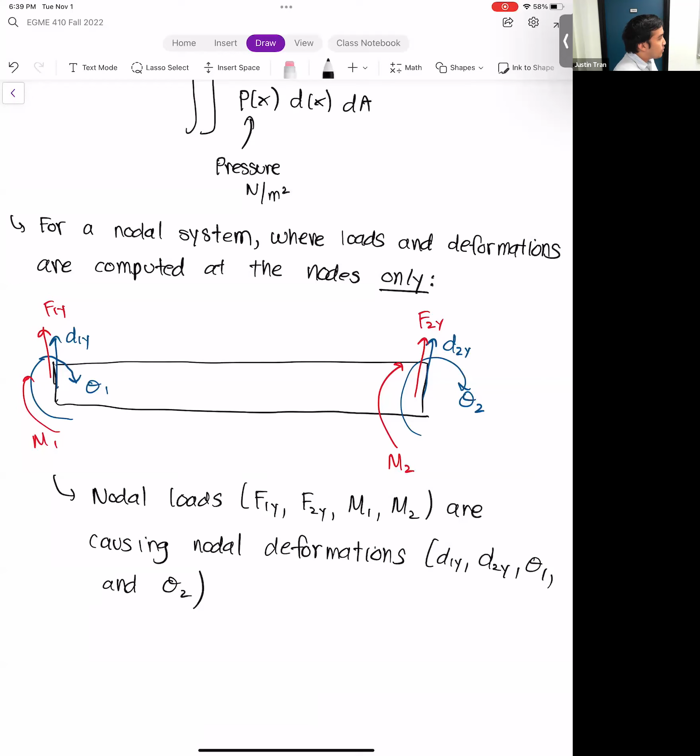And so it's the same as before, right? So we have a load, and then we have the corresponding deformations that result from those loads. And so based on this information, we can come up with a formula to compute the work done by these nodal loads as well.

So the work done by the nodal loads is going to be the product of force times deformation. So we have F1y times D1y, and that's the work done by F1y. And then to this, we're just going to add together all the other nodal works from all the other places. So we have F2y D2y plus M1 theta 1 plus M2 theta 2.

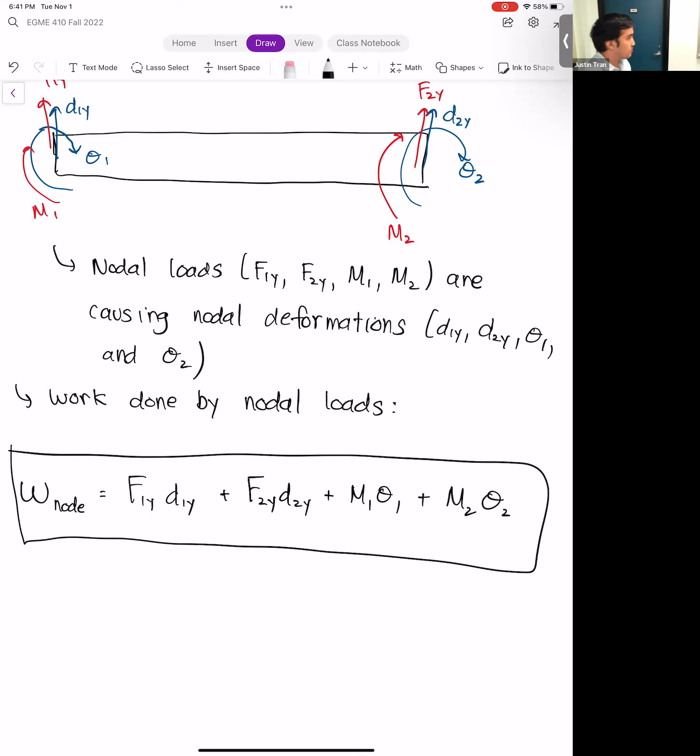So we have two formulas here. One formula is work done by distributed loading, and then we have another formula, work done by nodal loading. And so the key here is to note that for a case when the nodal load, we want basically the equivalent nodal loads to distributed loading.

Because remember, that's our goal here. So our goal is we're starting with the distributed load and we want to find the equivalent nodal loads. These two equations for the work have to be the same.

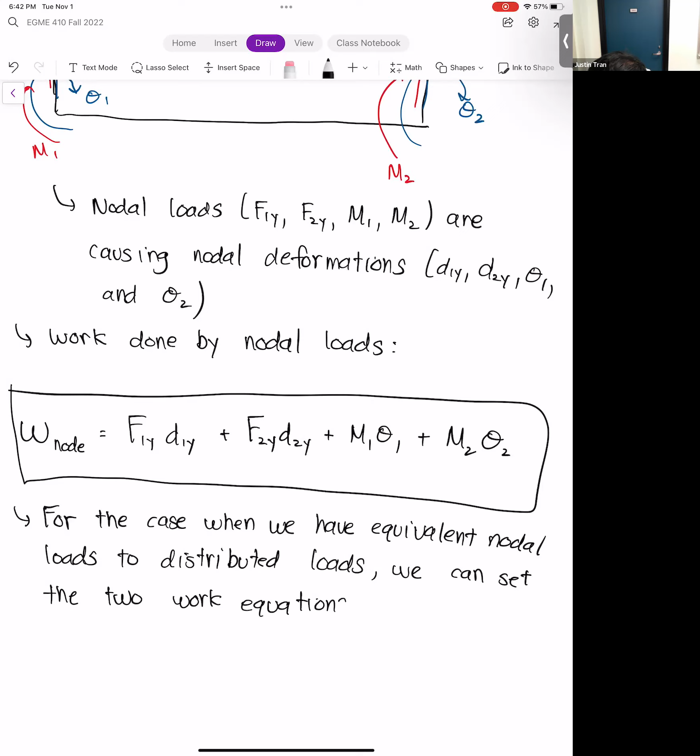And so we have work done by the distributed load, this is equal to work done by the nodal load. In other words, the integral from 0 to L of P of x, D of x, dx is equal to F1y D1y plus F2y D2y plus M2 theta 2 plus M1 theta 1. I don't know why I put M2 theta 2 first, but whatever. My hand is cramping, so that's it.